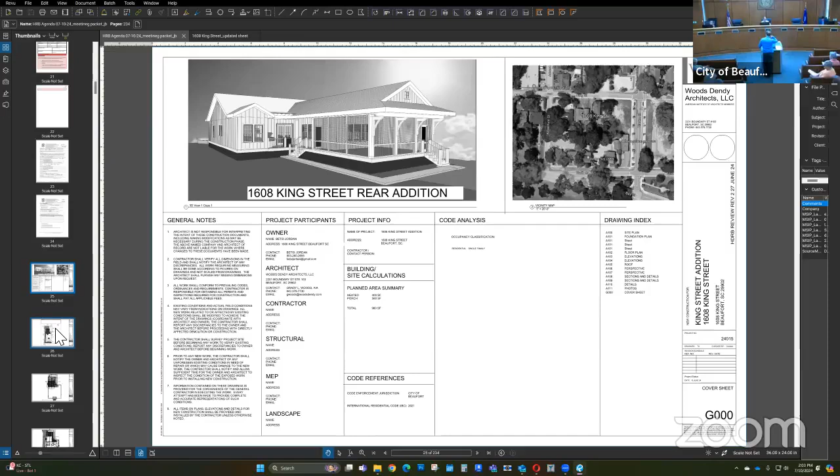Okay, this is 1608 King Street. It's about a 950 square foot addition to a non-contributing home, in the rear of the structure, split between a screened porch and an enclosed extra living area. It went to the HTRC, and they've provided some extra images for this meeting, forwarded to you this morning. No real changes, but essentially this is going to have board and batten. The roof and colors match the existing house, with asphalt shingles that match. No specimen trees in the rear yard will be cut. It is well above the 13-foot flood zone requirement.

Really, the only thing staff is recommending is that they provide cut sheets for the doors and windows, typical window and door details showing the window sills, a clearer site plan, and to note the material for the staircase posts, railings, and balusters. With that, I'll stop. And this would be a final. Asking for final, okay. Thank you. At this point, we'd ask the applicant if they'd like to come up and present.

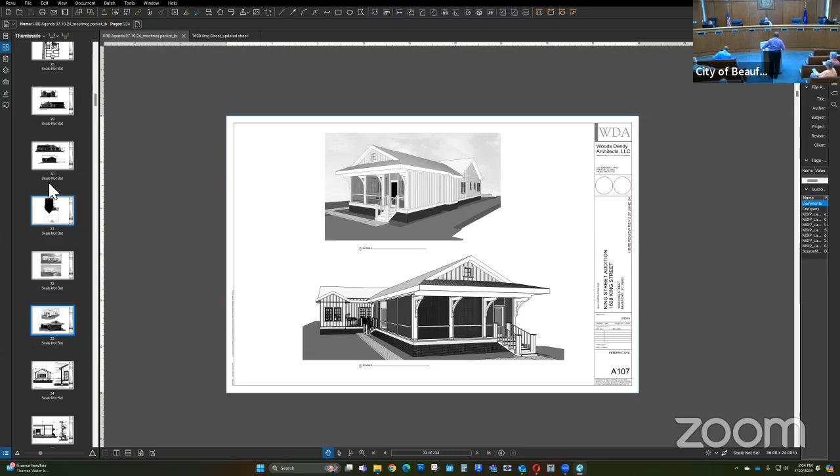Afternoon. My name is Thomas Henry, I'm with Woods Dendy Architects. Basically, the only thing not addressed that staff recommended was the survey, and we have that ordered. Everything else is pretty much in order. We got the window details, door details, sill details. Okay, very good. If that's all from the applicant, we're going to open the floor to public comment. If anyone in the audience would like to speak, like Ms. Lutz is coming up.

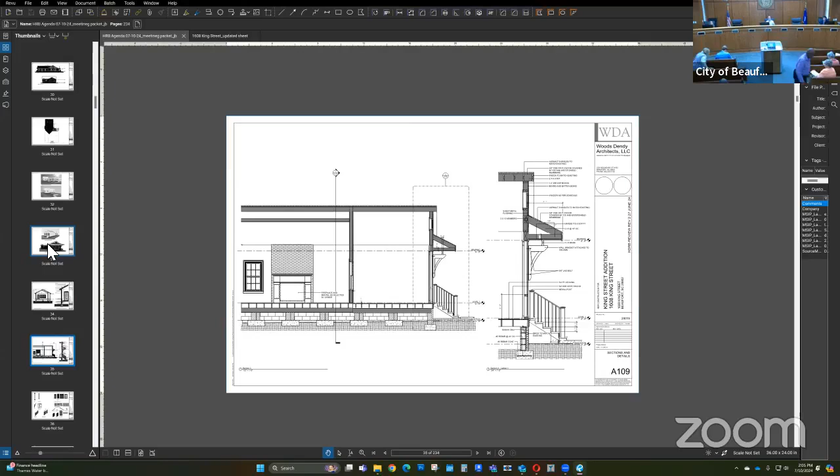Hi, Maxine Lutz, representing HBF's Preservation Committee today with Lisa. We're taking turns. We're very supportive of the project. The one recommendation the Preservation Committee had was that perhaps the returned hip roof configuration over the brackets be eliminated. We felt it's foreign to the vocabulary of the existing building and other treatments within the historic district and the Northwest Quadrant.

The committee offered the following recommendation for consideration: remove the current overhang configuration and replace it with a shed roof configuration, which would be more in keeping with the architectural patterns of the district. Thank you. Thank you, Ms. Lutz. Any other public comment?

Hearing none from the audience. Anyone in the virtual world want to speak to us about this? No, sir, no hands raised. Let's call for public comment. Seeing none, we'll go ahead and bring it back up to the dais for discussion. Okay. What are you guys seeing or thinking or hearing on this one?

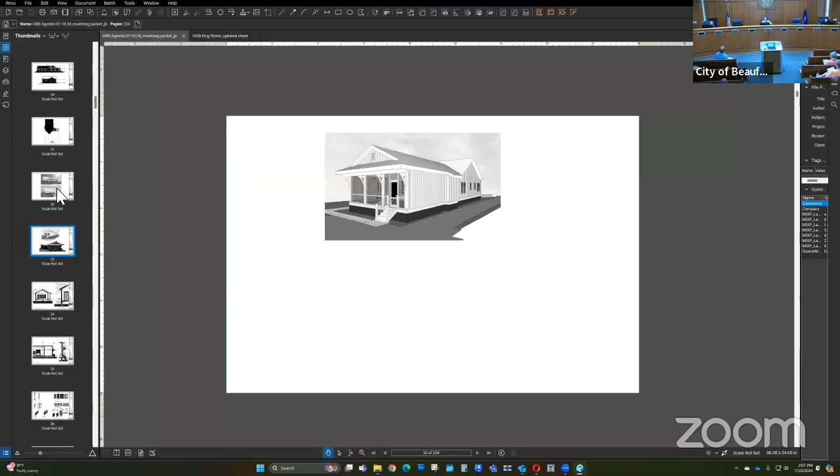I was just wondering about the fireplace, if there was a vent on it, because there's nothing shown. Say that again? An exterior vent, will it be vented? How will it be vented? Oh, the fireplace, okay. Well, let's see what we've got. We can bring the applicant up to answer the question for us. Yeah, the fireplace is not a real fireplace. It's internal only. Internal aesthetics.

To address a couple of items here as it relates to the roof. If you would go to that rendering, I did a few renderings that depict the sun shadow. That one is at 8 o'clock in the morning, the next one is a 4 o'clock sun shadow for that space, and this is a 10 o'clock.

So what we're trying to do here is to also address any concerns as it relates to sun. We're giving the client a nice space to be able to utilize during every time of the day because it has a southern exposure. So that's the reason we have that overhang. It is also going to protect from rain.

All right, since you're already up, I asked a question. HBF's committee looked at this, thought that the continuation of the hip roof into that shed seemed a little foreign for architecture in Beaufort, and it is. We don't see that often. Is that articulated correctly, or is that what you're trying to do?

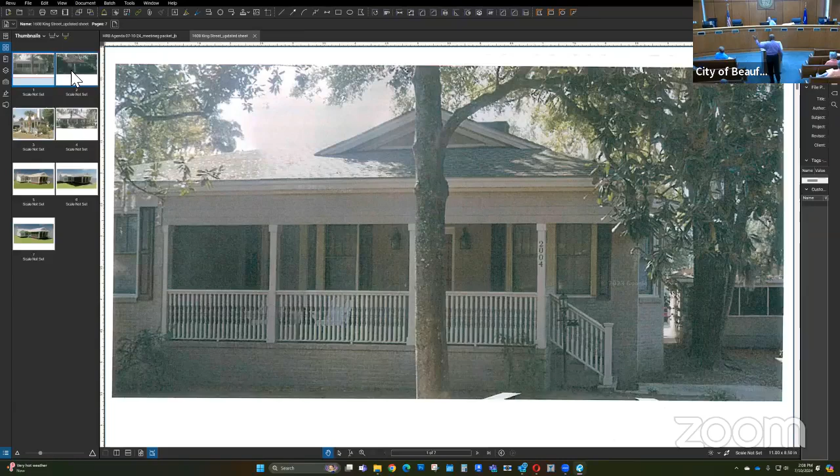Yeah, that's articulated correctly. I did go through the community and look at some of the other structures, which you can see in some photos. You have a structure similar to that. We're talking about the rear of a property now, but this is the front of someone's house, and it has pretty much the same concept. Same thing here. So within the community, you do have some similarities to what we put together. Okay, I'd call that a stretch, but I will entertain it. Okay.

Let's see, Mr. Bergman, do you have anything? You said you had the details for the windows and doors. The last sheet in the last set that we submitted should have it. A110? Yeah, there you go. We are reusing some material, some of the windows and doors, and we've articulated that. Up there you see the photos. So there's no new windows. Okay.

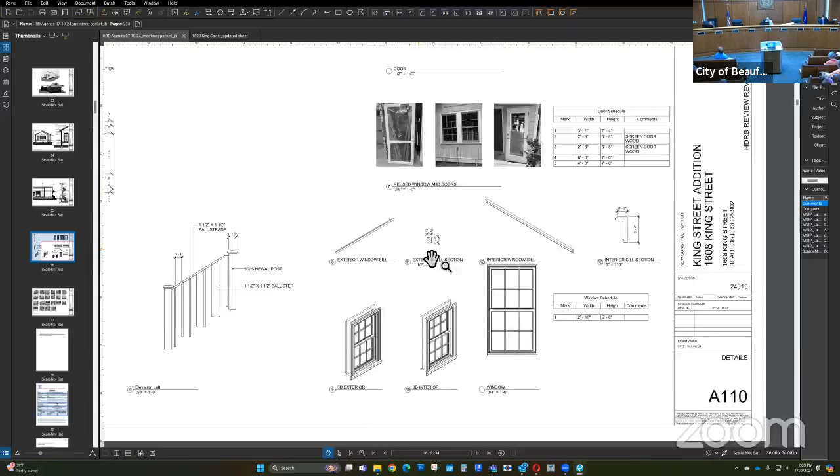Right. I didn't really have any issues with this project, to be frank. I thought there was a lot of detail that went into the notes and comments from HTRC and what's happened before. I think the staff recommendations made sense. I'm supportive of it. Okay. I don't have anything further on that. You have anything on that? I don't.

All right, I don't hear any other questions or debate on the merits of this project. Can I entertain a motion? I'll make a motion to approve with staff conditions. Second. We have a motion and a second. Any further discussion? Hearing none, I'll call the question. Aye. Aye. Aye. Okay. So staff, that's approved with staff's comments, correct? Correct. All right.

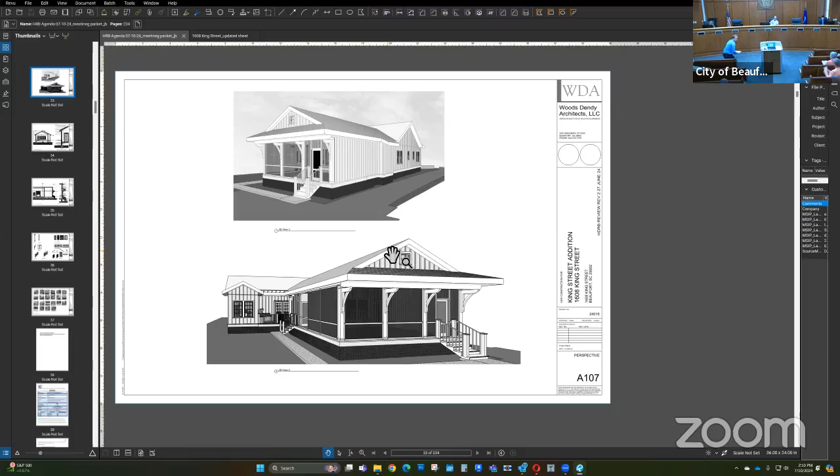We'll bring up the next project, which would be item B, 903 Harrington Street.

All right, this is a new construction at 903 Harrington for a roughly 1,000 square foot new house. Right now it's a vacant lot, about a quarter of an acre, so a pretty large lot for the historic district, that's never had any building that we could find on any Sanborn maps. So a 1,000 square foot house and then a carport and ADU and garage, as well as a pool. So that's a little bit of a difference that we see.

Look at this, it is in T4HN, so it is in the northwest quadrant as well. Looking at the floodplain, everything is well above. In fact, the lot slopes pretty dramatically, but it's almost double the 13 foot for the flood ordinance. Looking at trees, there's no specimen trees on site. There is a specimen tree that's right south of the property, so they are doing a tree protection zone when

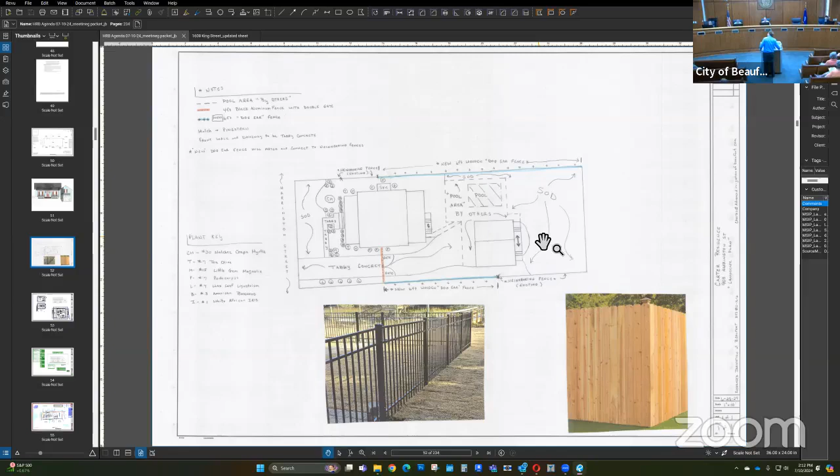they start building. But looking at the project itself, if Jeremy wants to put the house up there, that'd be great. Thank you, Jeremy. Sorry.

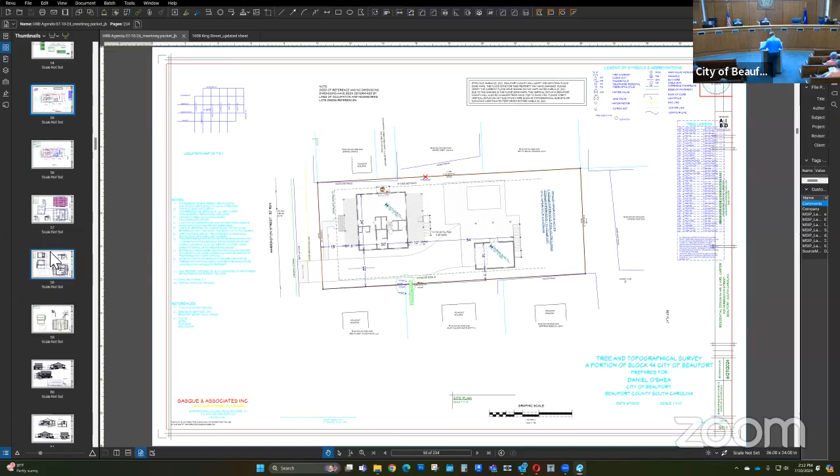They are proposing a 1-story with HardiePlank exterior, the Marvin Elevate, single divided light. Let's see, wood shutters, architectural shingle roof, and also wood railings, and a pretty sizable 8-foot deep porch. And so you can see the drop in elevation from that picture. So it definitely drops down quite a bit. And then the garage and the pool will be in the back there.

You can see all the comments that we had from the HTRC. It went to a few HTRCs; we started including that just so you saw how the project progressed. Looking at the surrounding area, you just approved a new 2-story house across the street on Harrington last month. But otherwise, it's an interesting collection of houses that have really no defined setbacks per se. So some of the houses are far back from the road, some are right up against the road,

but they're all houses. Looking at new construction for the 4.7.2 integrity, the 7 integrity guidelines, I'll let you go through that, but location, design, setting, materials, workmanship, feeling and association. So again, there wasn't a house on this property before, so they're not trying to recreate or be sensitive to that fact. It's also a very large lot, as we were talking about before, and I think staff in general feels that the size and the architecture of the structure would fit with the nature of what's around it historically.

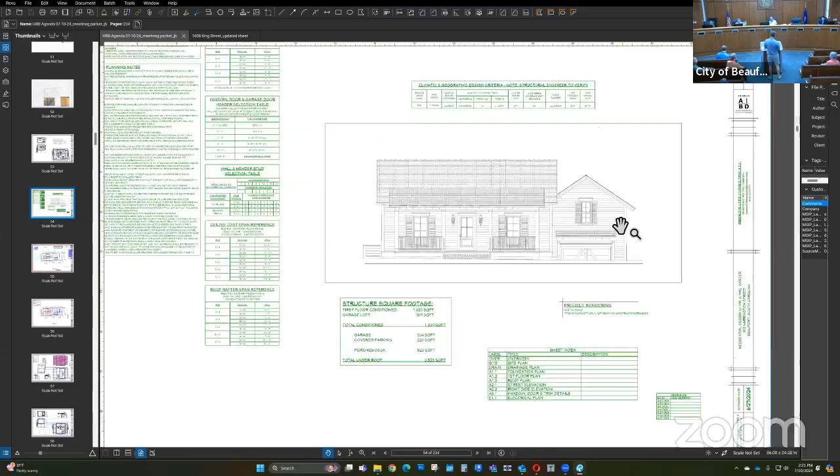Can we clarify which door? You've got one shown with an asterisk, but that looks like a glass. I believe the pattern is the front pattern on the first sheet, and then the glass pattern is on the second sheet. There's a star; I think that's what they're indicating. But it'll be white. Mahogany, color of the trim, I believe? It's the wildflower honey color. Color of the trim, I just don't have that in front of me. So I'm a little confused. On the second page of the cut sheet, the base door, you put a star next to true white with the Thames window. The front page shows basically 2 8 panels with windows above, and the third page shows a door with the wildflower honey. Which is which? Okay, thank you.

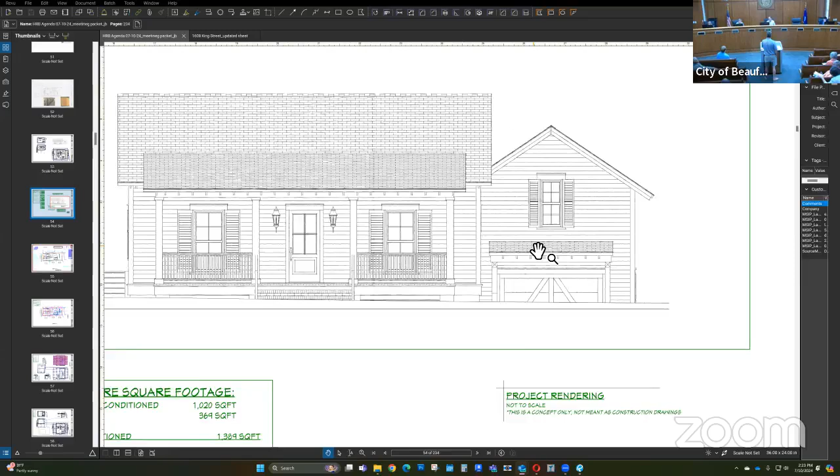Any other comments on the doors or windows? I apologize, I think I'm still unclear. So it's going to be a panel door with the glass across the top? Correct. I appreciate them submitting information to try to clarify, but we should have had this information prior, so we're not having to ask these questions during the meeting. But it is what it is. Other than that, I don't see any issues. I think it's a nice project. Because the site drops off in the back, the scale of the garage is even more appropriate because it doesn't compete with the house at all. So I think that's very much a positive.

So I'm willing to proceed with a motion, as long as they're addressing all the staff's comments, which I think they need to. Before you make the motion, whenever appropriate: HTRC, when they met, did they talk about stormwater issues related to this type of construction and how it affects the adjacent neighbors?

Did y'all get into that? We spoke about that at the original meeting, and there's an actual drainage ditch on the back side of that property. Everything's draining down to basically a culvert, a retainage area that's been there forever. That's functioning as such. Front of the county building over there? And once you go to the back, there's a fence line, and beyond that fence line, there's basically what amounts to a floodplain back there.

Because you look at the topo here, the entrance to your garage, and you've got a plantation gravel driveway, it's pervious, but that's good, right? Right. So concrete wouldn't work in this case, you'd flood your garage, but the bottom line is the house is to the right, or I think that's to the south of your project. Correct. Adjacent buildings are 15 feet, so it wouldn't take much for you to cause a problem with all the water on that property missing the garage and going into the neighbor's yard. You know what I'm saying? The bottom of that picture's on the right screen.

I understand that. I'm looking at some of the topo information here, and this is the typical Beaufort problem. Our neighbors come and build, and then they finish and grade and site change, and they affect the neighbors without even knowing it. And then all of a sudden, we have flooded properties and people upset. I think it almost looks like it would go to the bottom corner, the northeast or southeast corner of that property. I wish they had continued the contour lines to the far right side of that sheet, because it's considerably lower as soon as we get off of our property. Everything is going down to maybe the lowest spot around.

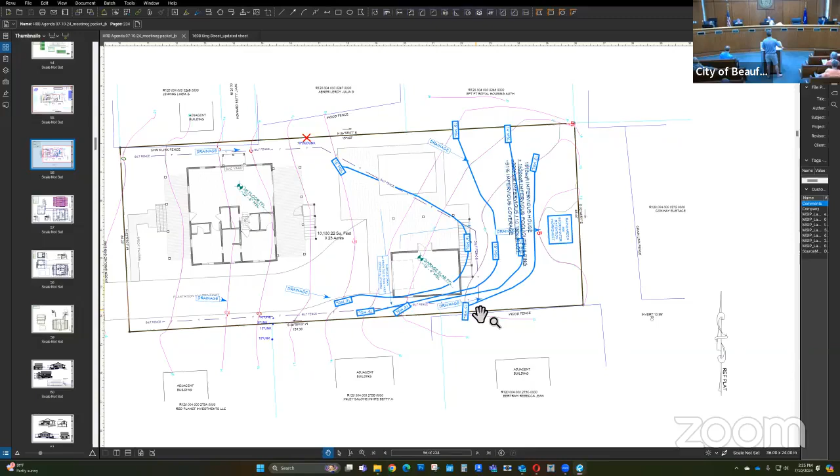I mean, it's low. All right, I just urge the owner to understand their responsibility of building, regardless of who says anything about it, is that stormwater is a real problem in this town. So please don't make the problem worse. I mean, we've got a swale down that side. I don't know. Are you suggesting that we put another drain in on that side? Well, you've got a pervious driveway, not a whole lot you can do, but if you have roof leaders that lead off the building somewhere, they're the ones that cause the problem. So underground retention or detention is the way to handle those.

And try to get every bit of your water, because this is what happened on this site. All the water is gonna go to the rear and it's gonna head towards your garage. Correct. I'd just be cognizant of that and try not to build up too high with your garage, but also, the elevation's gotta be critically correct. Or you'll have all those problems later that you remember me talking about. Correct, I understand. Yeah, you guys have been building for a while. It's not new to you. They'll be building it, but yes, sir. So, all right, very good.

So did you have a motion or any other comments related to this project? No. All right, so remember, this is for final, they're asking for. So that means they have everything that they're supposed to have. Staff's comments would be the only thing that would dictate changes at this point. I wanted to ask a question of the applicant, because if we are gonna switch this to final, I'm in agreement with the staff's recommendations related to the fence panels and not making it opaque, but I wanted to see, did you guys have a rebuttal to that or a reason why you wanted it? Or any contention to that recommendation?

What? So the staff is recommending that you nix the dog ear fence pickets. And that instead of them being butted up against each other, making the fence opaque, that you space them out, so that the fence is not opaque and the posts are visible. So it looks like your fence panels are in between the posts rather than the posts being hidden. Hang on. Yeah, if everybody's here and on record, I'd like to hear the dialogue that was coming back. So there's a question about the fence and its fenestration. Somebody want to tell us about that?

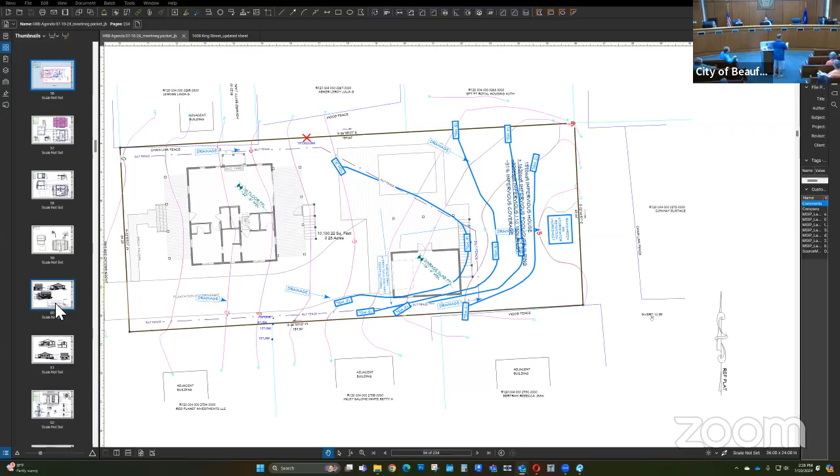So basically, on your fence, you want your boards separated so you can kind of see through. Right, you need to be able to see through. They don't need to be offset, but they need to be separated so that the fence is not completely opaque. Got it? That's fine with me. Fine with you. Yeah, wooden fences designed that way, living fences are appropriate.

So we go back to fences, a whole chapter related to that, or a small chapter. You can look through that and see some of the appropriate measures to take to do fencing. The most viable one in our city right now is like a Jasmine living fence. There's multiple benefits to that, rather than something you gotta paint all the time. But staff has their comments, and we sound like we're agreeing with staff on item number 4.

I just don't want to get you guys approval and you go down that path to try and build this thing, and then you decide that's not what you want and you wish you would have presented something different. No, sir. Seems fine to me.

All right, it's time for a motion. Got one? Well, with that, I would make a motion to approve with staff conditions for final. I'll second. Fine. All right, we have that on the table. Any further comment? None. All right, call for a vote. Start on that side this time. Start on this side, Kim? Yeah. Aye. Aye. Aye. Aye. All right, so that one's handled.

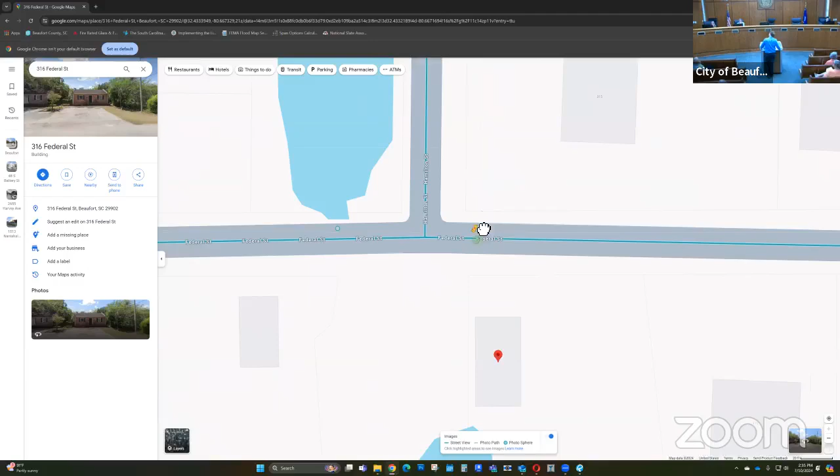And so maybe we should put those two structures on the screen. So again, this is kind of a unique situation. From the staff's point of view, these two structures are well over 50 years old, and they are somewhat unique. I don't know if the screen's freezing up, or I don't have access to it, but hopefully we pull that up. This would be an option where these structures could be saved and then the original February COA could be built, and that would incorporate those two structures on the lot.

So as you can see, they're really, especially in this area, the only two structures on one lot like this. They're also brick, so they are somewhat unique. They are over 50 years old. So they would meet, in staff's view, the requirements of 9.11.1. If you do approve that, it makes it a contributing structure. As a contributing structure, then the question would be, did the approval in February meet the contributing structure guidelines? I think that's something to consider.

You might want to opine on that. It's a very unique circumstance, but the end result would be that these structures could be essentially saved. So that's what's being asked today, and I'll let the applicant present their case. Thank you. Do we have the applicant? You want to please come forward and add anything? State your case.

Lynn King, 316 Federal Street. The only thing I'm trying to do is not have to tear these structures down and go forward with the plan that was approved here. Having said that, I'm kind of done. I don't want to have to start all over again and come back with a whole new plan and be 2.5 years from now trying to find a place to call home.

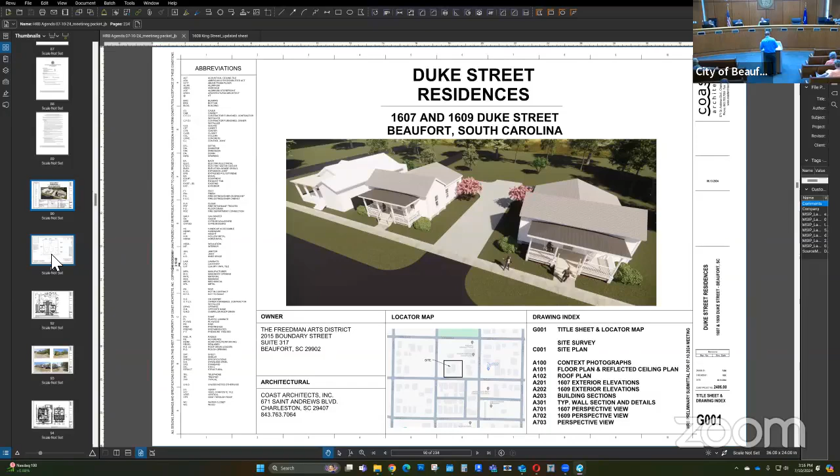The flood zone, it's got 23 to 24 feet. So it's perfectly high enough to not have any of the issues that we were just discussing before. Even those were for new construction, and they're only really removing two trees, a pecan tree that's not a specimen or landmark tree, so it can be removed, and a palmetto tree will be replanted.

The two structures they're proposing are basically similar to each other. And this is for conceptual, I should mention that. And I've also provided the HTRC comments from April when this was originally pitched. But those two structures, a little over 1,000 square feet for both of them, and accessed by one shared driveway. And I will admit, as a planner, I like shared driveways.

So I think the recommendation, and I've heard a lot of comments about that. There was just one driveway on this property. You can see it on the existing site plan. That was kind of to the right of the proposed driveway. And I think there's some concern that maybe it would make more sense to have two drives on this to be more consistent. But again, that's of your opinion. This is just conceptual. They are proposing kind of HardiePlank or cementitious siding, if Jeremy wants to go to that.

Both one-story cottages, basically almost exactly the same, kind of wood steps. They were proposing vinyl windows, so those would be expressly prohibited in the Beaufort preservation manual. So as you can see in the conditions, that's one of the recommendations. They're also proposing wood shutters, an asphalt shingle roof, and a standing seam metal roof on the porch, consistent with what was there before. Kind of two porches that are 8 foot in depth.

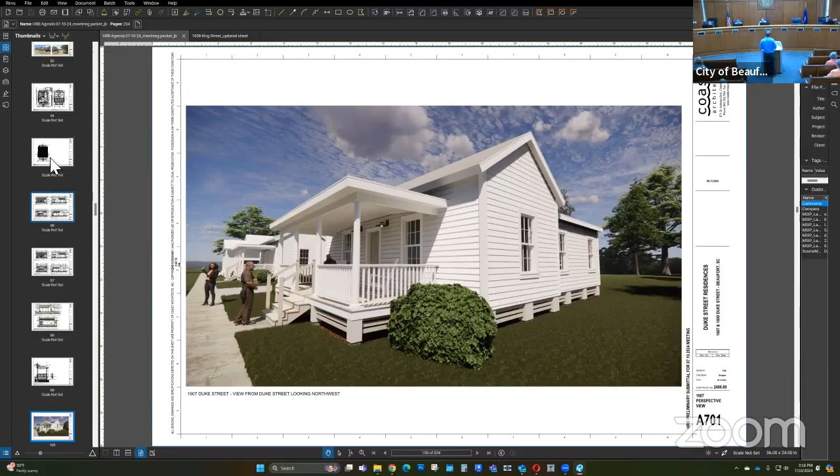And the foundation is horizontal wood, like treated slats there on the bottom. I'm trying to think if there's anything else. So we do have to use the 7 integrity standards that were mentioned in the last few cases: location, design, setting, materials, workmanship, feeling, and association. I think we've talked about the fact that there were two World War I era structures on this site. They were both single-family structures, somewhat close to each other.

I think staff feels like these two cottages being proposed would be sympathetic to what was there without actually replicating them, which would not be encouraged because it would not be honest to what was there before. Two, the design that combines the feeling of the streetscape and the mass and the scale of the architectural elements and details. Again, the one-story nature of them, the size of them, and the fact that they're sympathetic to what was there before but not replicating them meets that pretty well.

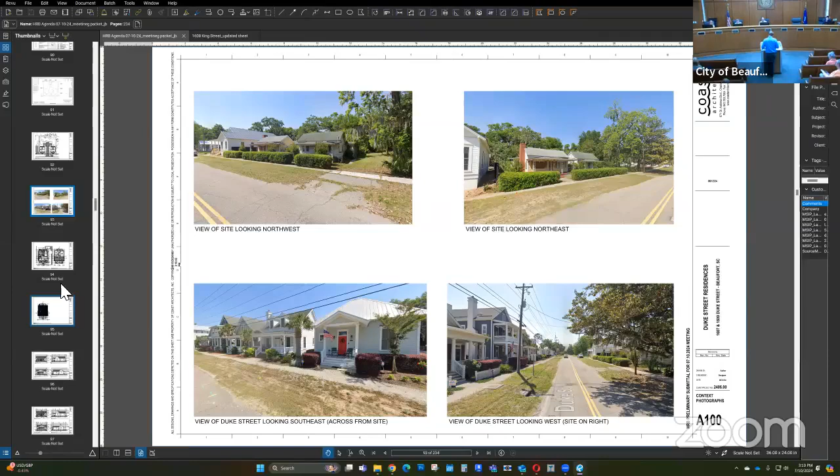3, the setting of the property, that's the physical environment of the property and how it continues to play into the historic district, including the topography, vegetation, man-made features, and relationship between the existing structures and their settings. So I talked about the trees. Really, they're only removing the one non-specimen or landmark tree, and they're replacing or moving the palmetto tree that's on the site. They are moving that driveway, as I discussed.

That is something you can consider, whether that one driveway would be in keeping with the historic nature of it or not. I will say that my staff report was thinking of it from a planning standpoint, where we're always trying to reduce conflict points, so if you want to opine. But we do feel that the cottages are sympathetic to the mass, scale and design of the former structure as well. So I'm kind of repeating that.

4, materials, that the materials are sympathetic to the historic nature of the surroundings. And I think we feel like the fenestration, except for the vinyl windows, the depth of the front porch, the standing seam roof on the front porch, all those things would be consistent. 5, workmanship, which is similar: is there evidence of the crafts of the particular time period, et cetera, that ensures the fabric is retained. I think we've talked about the same things, the vinyl windows, et cetera, being replaced, and we feel like this would definitely meet number 5.

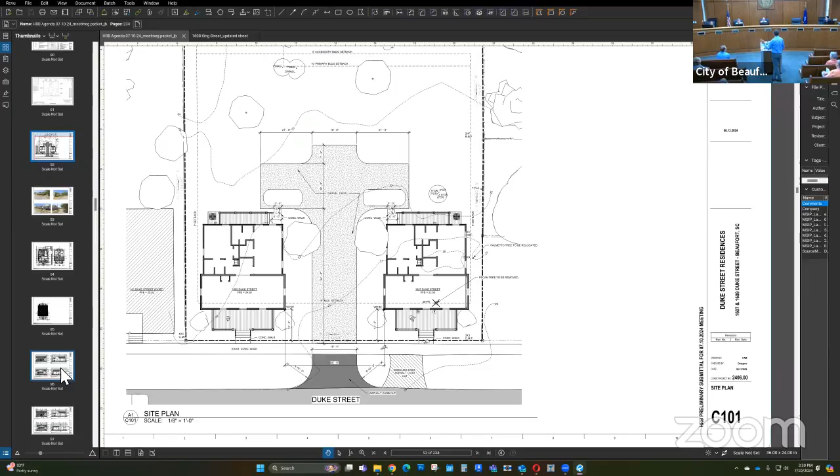So your comments were, are we to eliminate or consider eliminating rails on just one of them, or would both? I'd suggest you lose them on both, just eliminate them on both. Sorry, Mr. Chairman. Well, go ahead. I think the forms are so simple. Yeah. Why overdo it? I agree. These are simple cottages. In our final grading, we'll figure it out to make sure we're okay on that, but we were trying to keep it roughly around 2 feet, just so initially we didn't want to do rails.

And then the other, I didn't hear any comments on this, and there was a staff comment about one of the roofs being a shed roof on this rear portion versus being a gable roof. We actually initially had done a hip roof on one of them and a gable on the other, just to make a little differential. And the comment we received from them was, don't do that, because the hip roof is not typical in that neighborhood. So again, we can consider that, but I just didn't hear your conversation, so I don't know if that's gonna be a part of it or not.

As far as conceptual, I don't have a problem with the roof designs. I just think trying to make them different would be a direction I would take it, one more stroke of the pen to see if there is a way to differentiate. I would disagree, though, that hip roofs aren't part of the porch designs in that neighborhood, so they are appropriate for this scale of a building.

I did notice one more thing I'd comment on. You have your AC stand built into your porch deck on the rear, on the north elevation of 1607. And just in a practical sense, I've never seen that done. I think isolation of the platform away from the building will give you less problems in the future.

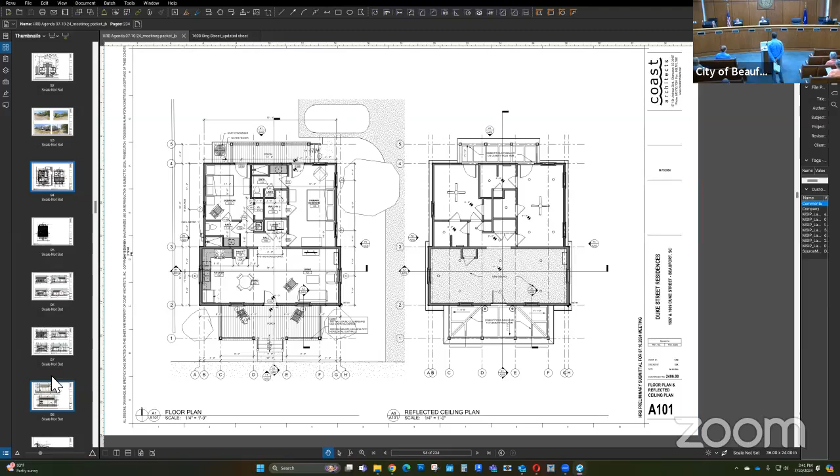Yeah. Okay, thank you. I just wanted to clarify. So it is conceptual. Any other comments? Get a motion for conceptual? So what do we want to add? Do we want to add that they restudy the driveway, in addition to the staff comments? Do we agree with staff comment number Delta about the hip roof and changing one of them to a shed roof?

I might be alone in this opinion. But I almost think they're similar enough. You do see some structures where you had brother-sister cottages that are identical, and the only difference is maybe what color they're painted. And I wonder if that wouldn't be appropriate for these, especially if you move them closer. So I don't know.

On the one hand, it's to differentiate them, but if you're only differentiating them a little bit, then to me it almost does look more like a tract-built home, because you see that in plenty of tract-built neighborhoods where you have a tiny differentiation, versus intentionally just making them the same. Agree. I think they're stronger like that. No problem with your comments on that. So again, it's a conceptual level. Right. But with that, we have a credible architect, I think we defer to them on if they want to differentiate, but I think keep it simple. They're strong that way.

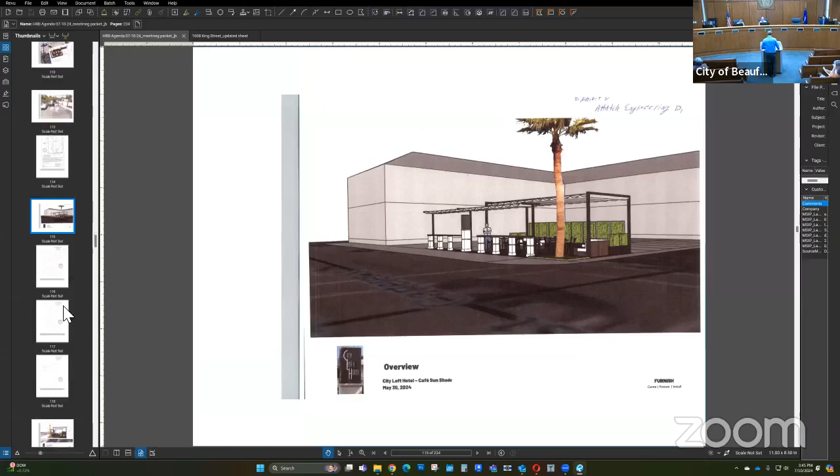Let's see, they're metal posts, 4x4 metal tubes. The bar top is wood. It's proposed to be laid over the existing bollards. They're going to uplight with LEDs. They have a fabric roof that we've looked at. And then they have 4-foot and 6-foot planters and screens with climbing plants that they've proposed, Carolina Jessamine.

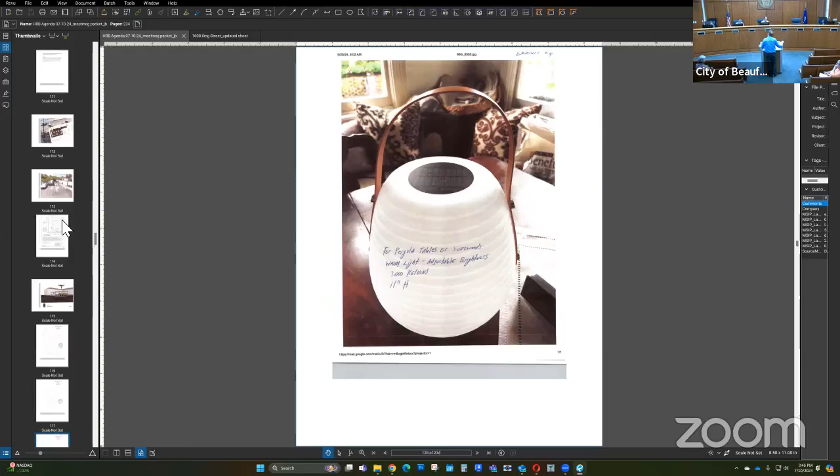So I think staff is comfortable with at least all the things that they have proposed. We do have some recommendations with that, and that's if you consider this, and this is for final approval, that really the first one is I think staff feels like because there are so many conflicts potentially with the ADA space for that small 4 by essentially, I think 17 or 19-foot area. That's not the square area, but the area that's to kind of the panhandle there of that kind of Oklahoma,

if you will, section. I guess staff doesn't feel like that's really a very functional space, and it would recommend removing it from this. It would recommend not approving that space. We just feel like just too many conflict areas with parking, and it just isn't functional. That they provide engineered stamps on the metal beams. They'd have to do that anyway before they got a permit.

And they're recommending a lighter lattice for the climbing plants, and maybe not as heavy planters that they're proposing. We feel that that's a little, I guess, heavy for the area. And so those are the staff recommendations, but otherwise, again, this would be final approval we should be looking at. So I'll turn it over to you. Okay, thank you. We'll open the floor to the applicant. Mr. McElhaney, you want to come tell us anything different from last time?

Good afternoon. My name is Matt McElhaney. I'm the owner of 301 Carteret Street City Loft Hotel. I believe that Kurt sent me a number of questions, and most of which are related around the ADA compliance as the space he described adjacent to what he also described as Oklahoma. I have complied with the code. I think I showed in the second submission, we're at 195 inches in width, 18 feet in length at that space.

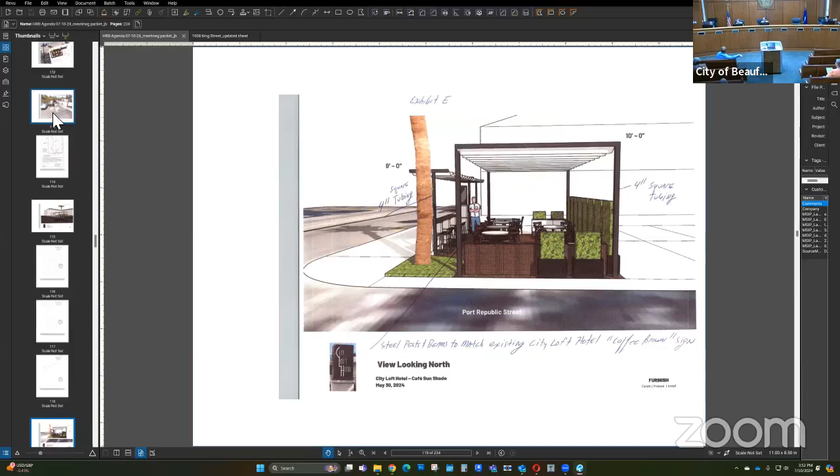I saw their comment about the weighting of that piece, that lattice attached to the planter, which it does look heavy. I don't think that particular setup is great, but I don't think he's advocating for that setup. He's advocating for that color. Is that correct? So the color's fine. The whole project's fine. Right. I have to say, I like the panhandle, as you call it. I think it creates a nice buffer from the parking lot. Yeah, the ADA stuff looks like it's in compliance. It doesn't bother me. Yep.

Okay. Mr. Woods, you have anything? No, I think it's gonna be a nice little addition to that corner. I see no issues with it. Okay. I'm gonna drink coffee there.

I don't have a problem with either, and I'm kind of agreeing that I think the applicant's proven that he has enough room to manage his property for ADA parking, and if he doesn't, and he builds this and he blocks it, it'll be another price to pay later by someone else and not this board. But it looks practical, whether he serves on it or you stand on it and have a cup of coffee or read your magazine, doesn't matter to me, but I don't have a problem with it as presented.

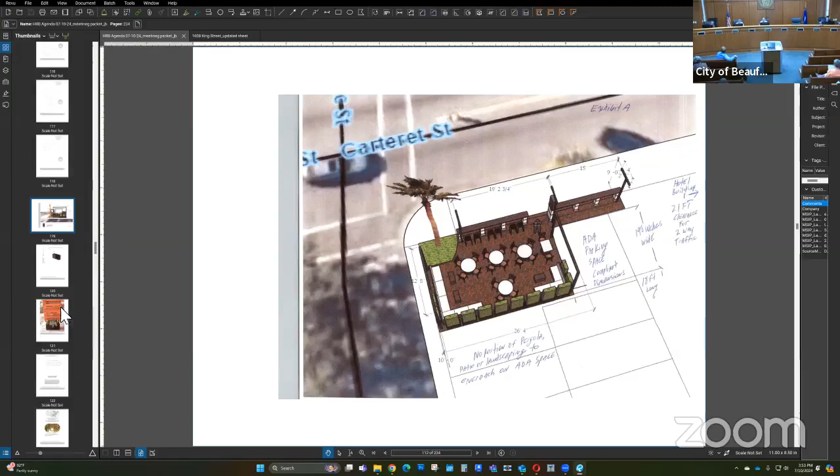So I think staff comments are all good except item B, if we're all disagreeing with their comment on that. I think B and Delta, because I think Delta was presuming that that cut sheet, if you will, was indicating that specific type of wood lattice. I don't think that's what the applicant's intending. I think he's intending to use that as a reference for the color of the lattice, not that specific. Okay, well, they're recommending a lighter material though.

Okay. I think we're ready for a motion on this one. Would you like to make a motion? I motion to move forward with staff approval. Okay, and recommendation item B on staff, make sure if you have anything you don't agree with on staff comments, make sure you highlight that. Oh, okay, got it. So I'll make a motion to approve with staff conditions except for item Bravo and item Delta.

Second. We have a motion and a second on the table. Further discussion? None. Is that okay with you? Aye. Okay, let's go ahead and vote on it then. Go ahead and let you vote now. Aye. Aye. Aye. Okay. Mr. McElhaney, you can go to the next step now. Pull out your checkbook.

Can we take a bathroom break? Yeah, let's take 3 minutes. Yeah, that's a good idea. All right, so look, staff, we're gonna take a 3-minute break, folks.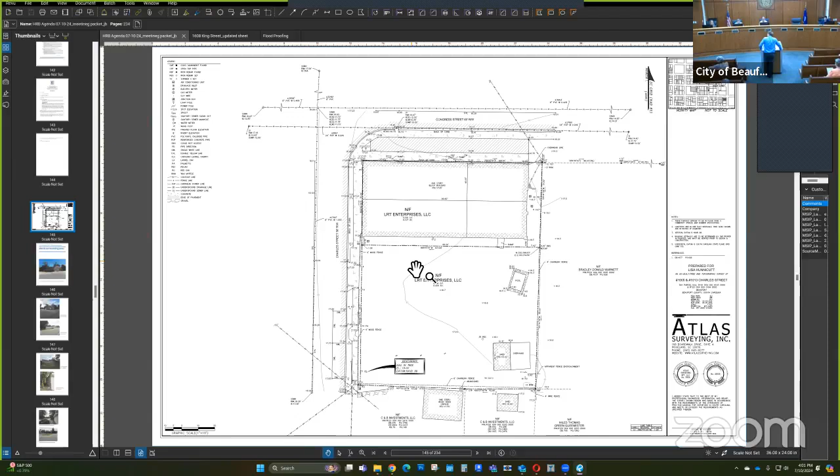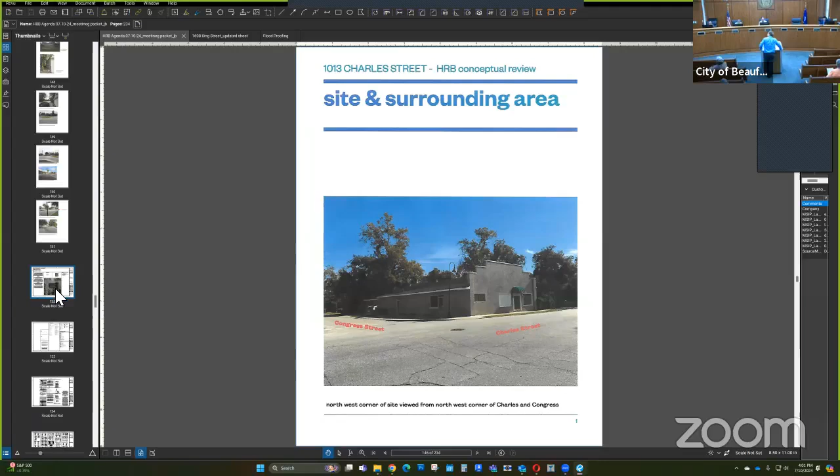All right, let's go ahead and bring this meeting back in order, and we'll continue where we left off. Okay, we're moving right along. So 1013 Charles Street, they're recommending conceptual approval, and this is basically to add a second addition on an existing commercial structure at 1013 Charles Street. It is zone T4N, and there's the structure right now. I think probably everyone's pretty familiar with this building.

It is currently non-contributing, and I was trying to find the age on it, but we couldn't really get an accurate age on this building. It looks older than one can imagine, actually. But it is in flood zone X. The elevation is 17 to 18 feet, and they have not done a tree survey as yet. It is a conceptual case right now, but they'll have to do that later. Right now, it's kind of a small lot, but the applicant owns the lot to the south of it, where they park the tour carriages.

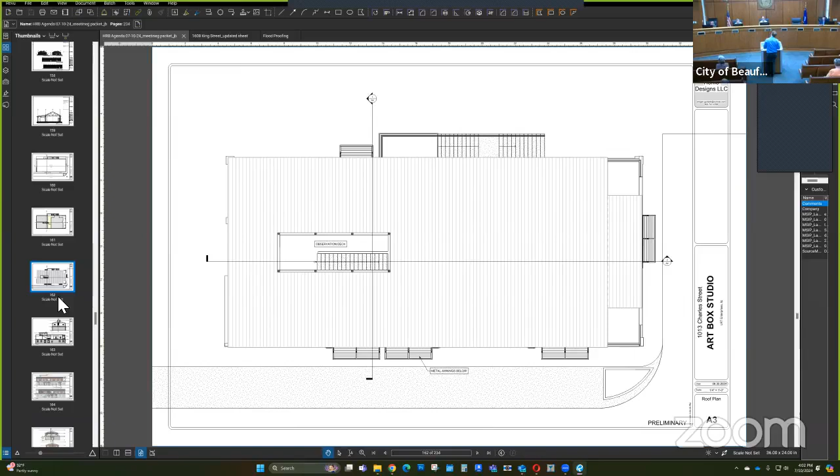So both of the lots, I think, are being considered right now, but they're proposing to structurally reinforce the existing little over 4,000 square foot building, and add another 4,000 square foot second addition, and to turn this into a mixed use building where there's retail, I believe 3 retail, office, coffee shop, something of that nature on the bottom, and then 3 flats or dwelling units to the top. So that is the proposal.

It went through a few HTRC, both on 5/29 and 6/12. So you can see it received some extensive comments, and they made some extensive revisions since those HTRC meetings. And they provided some 3D views. So looking at it, they're proposing a stucco first floor on that retail section, and a brick veneer on the second floor where they're proposing the flats. They're proposing a collection of different window types, but again, the final details of those wouldn't be until preliminary and final.

Glass doors, they'll retain the existing parapet roof. That was a big discussion at the HTRC meetings, as you can see in the packet there. Also adding some awnings on the two front entrances. They're proposing a standing seam metal roof with a barrel design.

Also, they're proposing like an observatory deck that goes up to 34 feet high on top of that roof. Otherwise, this is about 24 foot high for the second story addition. I think I've talked about the fact that it's well above the 13-foot floodplain requirement.

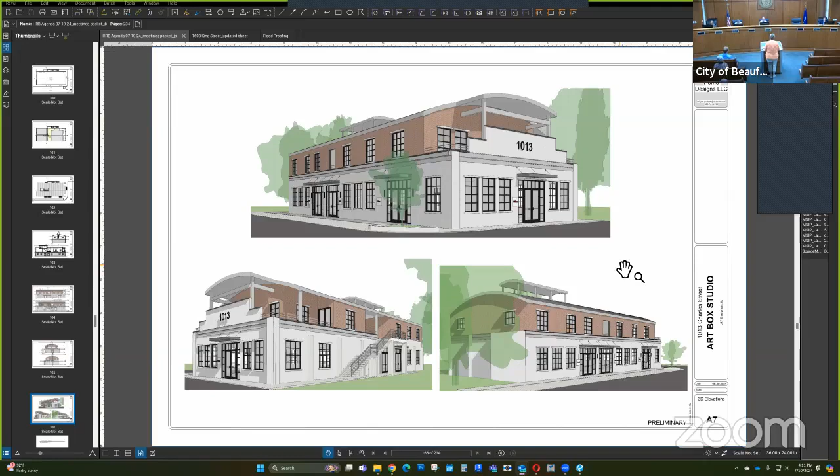We support it. We support the second story going there. The goal was to really follow the narrative of the original piece of architecture, and in adding that second story, I think we and our committee think that a sensitive design was accomplished. Thank you. Thank you. Any other public comment? Okay, hearing none, we'll close public comment, bring it up to the board.

This is a conceptual review of an existing commercial space that I believe is zoned as neighborhood commercial at that end. C4N, and that includes any residential uses and commercial uses, correct? Yeah. So what we have before us, we're taking a modification, adding a second floor to an existing structure. Any comments? Yes, Mr. Chair, I'll start.

Transformational. This is exciting. This is what it can be when you work together and you have good architecture and good design. It's just amazing. I agree with what's been stated. I appreciate what the applicant stated earlier, maybe reducing that to a clerestory element on the roof, minimizing it just so she can allow natural light to come into that upper corridor. Hopefully staff would agree, and Mr. Buford would also agree. I think that would be a good design change, and removing that barrel roof extension.

I agree with all of those items, and I know this is not our purview, but I have to ask, is this on-street parking? How are they dealing with parking on this? I'm just curious, because I don't see a site plan. The property to the south is double the size of the current lot. I see the vacant lot, but I don't see any development of that as far as the parking. Yeah, they haven't provided a landscape plan and a full site plan, so parking would have to be provided on that lot. The residual part of that site would be on-site parking. That's what I understand. Obviously the applicant's online, but I think they just haven't gone to that next step, and they just want to get conceptual to make sure that you like this idea.

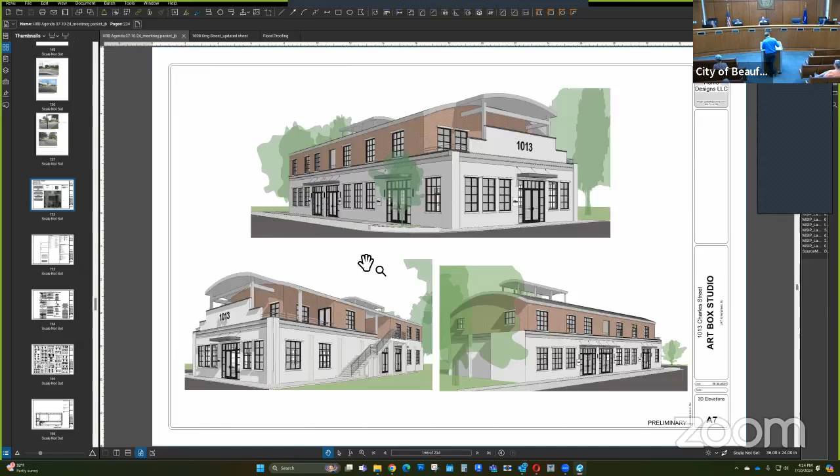But this is not unlike the next one. Parking is required here. We can count the on-street parking that's around it within a certain measurement area. But if we're giving a conceptual approval, shouldn't parking be part of this design? Because I know we're looking at the building, but I think it has to be. The lot to the south of it is a decent sized lot, and so I'm pretty confident they can fit that in there.

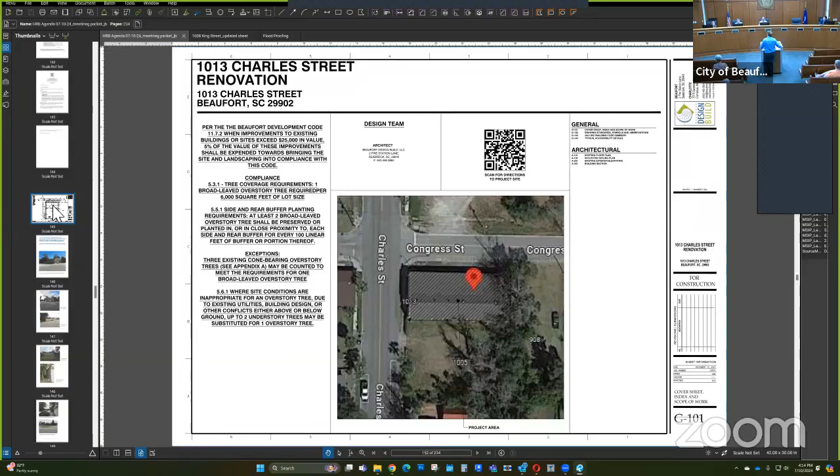Would they have to... so there's two things that they'd be doing here. I know this is a little bit separate, but this would be a change of use because it's going from commercial to mixed use. And then they'd want to use parking in an adjacent parcel. Would that not require a combination plat? It's the same lot. Oh, I see. Okay. That's helpful. Yeah, the other lot's almost 10,000 square feet. I think you're just approving this concept, you're not approving the parking, you're just approving the conceptual design, and that would be developed as this project moves forward. That's correct. And obviously in the conceptual approval, you're asking them to come back with all those details. Yeah.

And they're not going to get through the process without providing proper parking requirements for the use. So I'm okay with just opining on the structure itself. And from the comments I have, I'm not really excited about the observation deck, and I kind of question, other than light coming in, which would normally be a skylight, why would you give up that much interior space for that feature?

I mean, I get it if that's something that you feel important, but that neighborhood is a combination of a streetscape, it's neighborhood commercial, that has some commercial zoning history all the way down that street. But it also has neighborhoods adjacent to it. And what are we observing from the observation deck? Just open air? Architecturally, it just seems like an odd hat to put on top of that barrel, plus it adds some complexity to how to maintain that structure.

I always look at it in the sense of what do you do 10 years from now with our climate? Is that glass? I'm assuming that could be glassed in, but then it's got to be conditioned. If it's not conditioned, it's a breezeway cover. I don't have a floor plan that really shows me how that's separated. But I think the applicant has already gone beyond that. You wanted daylight in there. Right, but as far as the observation, now it's not an observation. She's conceded. That's just a clerestory, just to bring natural light into the upper floor, if I understood what she said earlier.

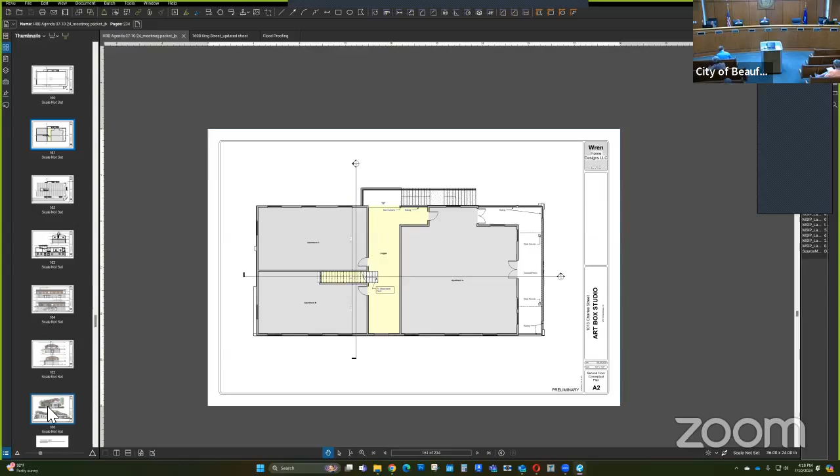Okay. The other question that came up was the barrel top at the front of the parapet. Well, I don't have an issue with the way it's designed currently. I like the concept staff presented with maybe a flat awning of some sort that matches what's below the sign numbers. If it's the width of the upper part of the parapet, or maybe it has to reach all the way across the double doors, it'd still be appropriate, but I'm not totally opposed to that curvature design. I'm actually with you on that. I don't know what is gained by getting rid of the barrel roof that protrudes over that deck and swapping it out for a shed roof.

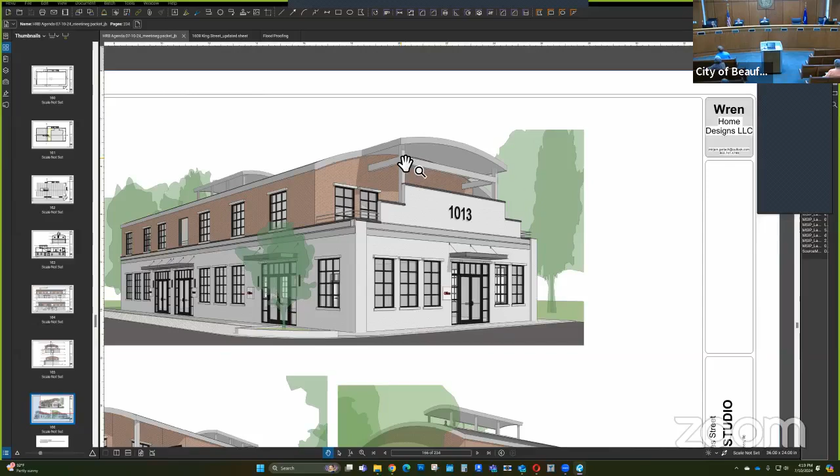I guess Jeremy or Maria, what was the thought process behind that? Yeah, can you hear me? Yes. Okay, good. My mic's working. Really, it was just more about the awkwardness. Visually, it seems a little awkward the way this is engaging this front parapet, this horizontal component here. Right now it doesn't seem well thought out. Our first thought was to pull that back, away from the back of that parapet, and then, as mentioned, to float something else here that might be a little more subtle, but still provide shade. I see. I could sympathize with that.

Okay, so I would say that if we gave them conceptual approval on this, we might want to have them, in addition to the observation deck, noodle on that, again, considering staff's comments. And if they want to come back holding firm on their design, I'm okay with that. If they want to show us something that meets staff's comments, that'd be nice to see. And then we have something to compare to.

As far as the overall adaptive reuse of this building, I think this is an incredible opportunity. When I was a young teenager, there used to be a bar that I'd walk into, but I was escorted by a parent.

So that whole end of Charles Street was a commercial zone that was, I believe, different than it is today. It was Charles Street. But that's one of the last remaining buildings in that use, I think, down there. But it'd be nice to see it turn into this. So I'm supportive conceptually. Any other comments related to what we actually see here?

Yeah, I agree with the staff comments regarding the barrel. I don't think it's necessary. I think it takes away from the original building. I like the fact that the brick part, the second floor, is recessed back so that the front really pops. And I would love to see some other options for providing protection from the light, but, excuse me, I don't think the barrel vault coming out is appropriate.

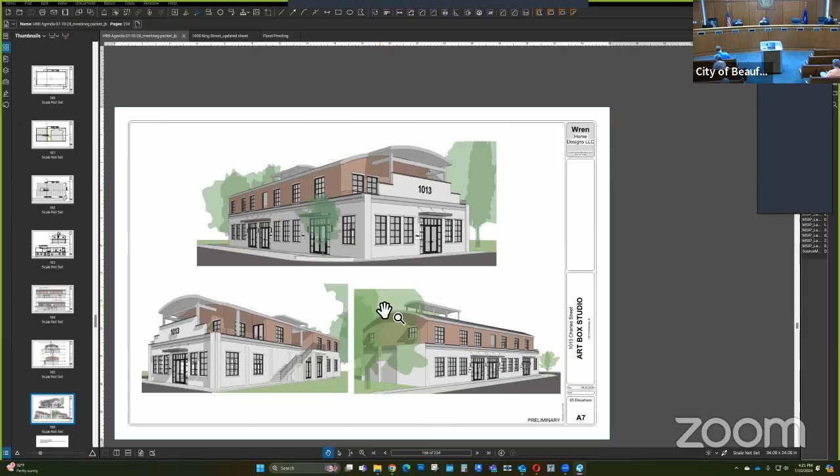I'll make a motion that we approve this conceptual application with the staff's comments. I'll second that. Okay, we have a second. Any further debate on that? Hearing none, we'll call for the vote. Aye. Aye. Aye. Aye. All right, thank you, applicant, for a nice presentation.

Thank you. And I have to give a shout out to Adam Bury for the original barrel roof concept. So thank you, Adam. There's candy in the back for you.

All right, we're gonna move on to the next one, which is item G. Okay, yeah, this is 1406 Greene Street. Staff is recommending conceptual approval. I think the applicant applied for final approval, so just so you're aware. And there's one slight little error. I did put accidentally contributing home, but the rest of it says non-contributing. It is a non-contributing home, circa 1965, with a CMU exterior. It is in the T4HN district.

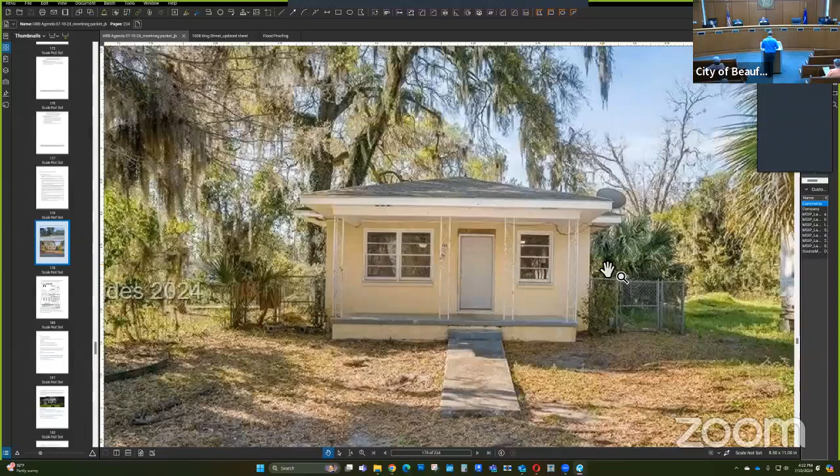This is essentially like a rehab of this house, so no trees will be affected. The flood zone, which is way high at 24 or 25 feet, also doesn't really come into play either. Again, a small house. They're proposing to install a metal standing seam roof, fix up this house to convert one bedroom to a bathroom, remove a door from the side of the house, convert one of the rear windows into a door, paint the home, remove the metal columns on the front porch, add board and batten on the front exterior, and a tabby foundation as well.

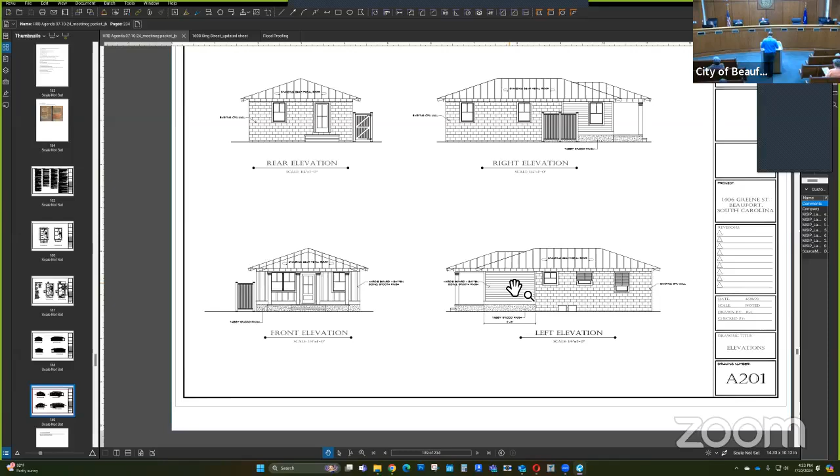So that's the overall. Again, it's a non-contributing home. It did go to the HDRC in April, and you can see some of the comments that were discussed. The windows they're proposing are the Kolbe fiberglass window. I think I've talked about the rest of it. There's a lot of staff recommendations on this, too many to really read, but essentially that's why staff feels like this really should be a conceptual level approval.

A lot of the concerns are just, it does have that unique CMU block exterior, and there's a lot of concerns about changing that front and how it affects the historic nature of it. And also concerns about using a tabby for the foundation. That's just not recommended under the preservation manual to be replicated. It's very hard to do. Just thinking about different siding material, and also the Bermuda shutters, providing cut sheets; they're thinking about that.

There's a lot. I just won't go through them all because there's like 15 of them. But I'll turn it over to you and let the applicant make their case. That's it. Thank you. Thank you. All right, we'll bring the applicant up to talk to us about what she's trying to do.

Hi, my name is Lakshmi Poe. I live at 911 10th Street, Port Royal, and we bought this property about 2 months ago, and we're trying to rehab it, and I want to say that we're very interested in keeping the ecological, historical value of the property, right?

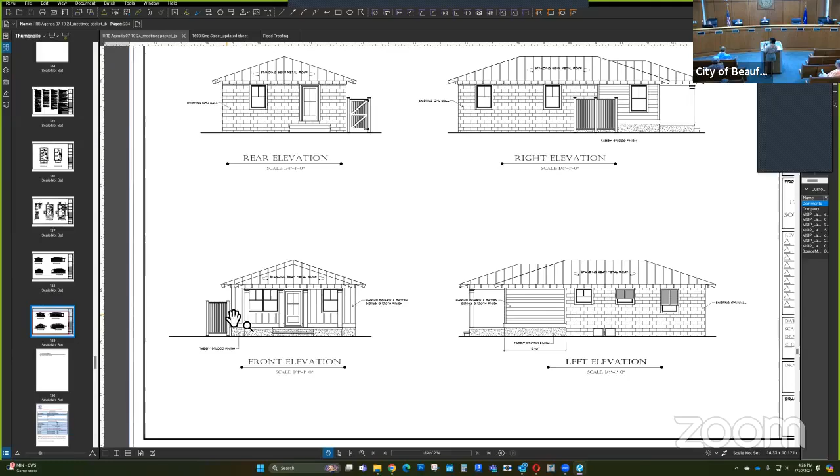Then the porch pillars. Unfortunately, as beautiful and original as they are, they are kind of rusted through and they are bowing out. They are structurally unsound. Again, I'll show photos of them in my later submissions, but they're rusted at the bottom to the point that they're bowing out. And in our home inspection report, they even reported that there are some horizontal cracks right above the door.

That's not visible in this photo, but we're going to meet with the engineer on Saturday. That guy will tell us whether or not these porch pillars are structurally sound. And maybe if they are, we'll try to keep them. Who knows? But very likely they will be replaced.

The staff at the HDRC supported cedar wood columns, albeit narrower, 4 by 4 inch. I'm cool with that. I could also support metal tubes, 4 by 4. I could also support something like wrought iron that takes a similar shape, like a very thin tube and circles and stuff like that. I can also support that. And yeah, I think that those were their concerns.

And oh wait, the siding. Let me work on that, because I feel like I got a lot of opinions that maybe we can just refresh it with just a stucco finish. We don't need to do board and batten. We don't need to do lap siding. But the staff did say, even though they don't support it, okay, they'll live with that, I guess. Yeah, that should be all the major concerns.

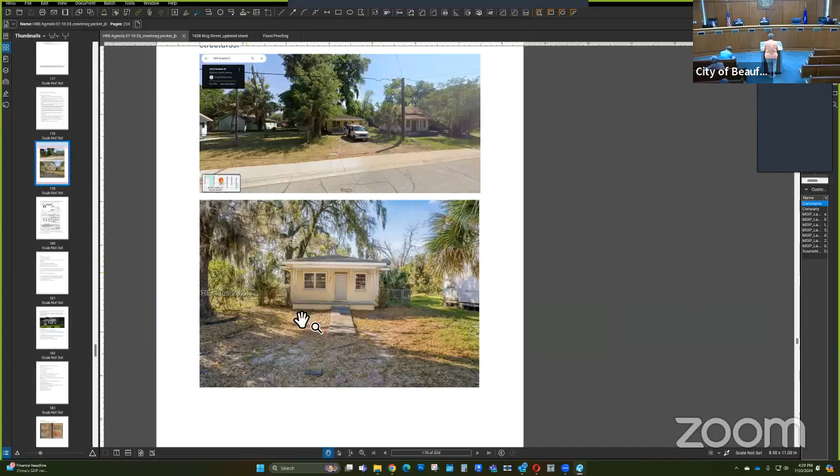The windows are another character defining feature on this structure. And I understand that they may need some work, they may need some repair, but without any documentation that the windows are unsalvageable, it's really hard to say do a wholesale removal and replacement of all of the windows in this house. We too were a little bit confused at first by whether it was contributing or not contributing, but I think the standards, just as they would apply to the two structures at 316 Federal, have bearing on this too because of those critical character defining features.

The metal posts that are coming down also could be salvaged, or they could be purchased, recreated, or repaired. So just because something's rusty doesn't mean that it cannot be salvaged and saved if someone wants to respect the historic narrative of the architecture and of the property. So I think the concern becomes, where do we as a community want to be with respecting our mid-century modern history within our community?

Because by covering it with siding or covering it up with a stucco finish that it never had, by replacing the windows with windows that are not at all similar to what it had before, so no in-kind replacement or repair of what had been there before, and removing those columns takes away those key character defining features that really speak to the workmanship and the craftsmanship that went into that property, which was probably a worker's cottage back in the day, in the 50s, 60s, when it was built.

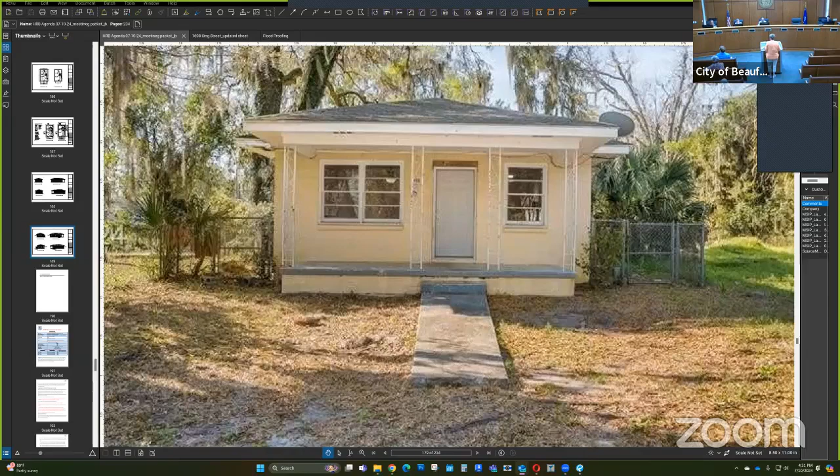And I think that's an important part of our history, an important part of our narrative. So I will leave it with that. But we support her investment. We are very thankful for their interest in wanting to be a part of the community and the historic district. Thank you. Thank you, Ms. Sundell. Any other public comment?

All right, not hearing any, we'll bring it up to the board for discussion. I have a question for Lisa. Lisa, are the steel columns, metal columns, are they original, do you think? They've definitely been there since the 60s. I'm afraid that this building is important. I agree they should stay or be replaced with something almost a replica of that.

It seemed like everything, all these others are getting a little too farmhousey and clunky in some ways with the 4x6, 6x6 columns, et cetera. I think this is a very distinct look. I also agree with the comment about keeping the block, just keeping it in its purest form.

I understand the issues with the windows and replacement, but if you have to replace them, why can't you try to replace them with windows that match what's there instead of trying to change it to, again, more of a low country 2/2 or 2/1. I think that it's so simple and crisp. I think try to keep it as close to that as possible.

Other comments? I had some comments related to the presentation, but I guess I have a more philosophical question for the board and anybody present that might be willing to share their opinion. At what point does something become historic and worth saving? Because this is mid-century modern and we're saying it's worth saving, or that's your opinion and Mr. Wood's opinion.

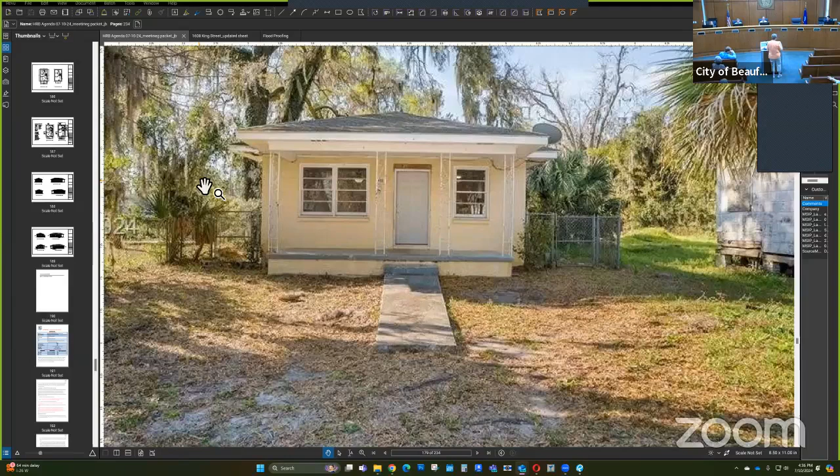Right. So that gets taken into consideration as kind of a given, that you're looking at 50 years or older. But who says every property that is 50 years or older is significant or brings some sort of character defining element or feature that you want to recognize and preserve? So it's still kind of building by building.

Right. But I think we have to always remember, and it says this in the preservation manual, and I think the code too, that the district is the resource. And those elements within that district all have significance from the perspective of the historic documentation, the direction of the National Register, and where the recommendation was to take it up to 1973. But again, right now, the period of significance is 1953.

Right. So it's 50 years old. Right. No, I think I'm good. I understand. The point is 50 years, but then it also has to be something characteristic of an era. And I guess my point would be, that makes sense to me. I think the more important thing is it characteristic of an era and less important about the time. And its own heritage and design based on those seven integrities.

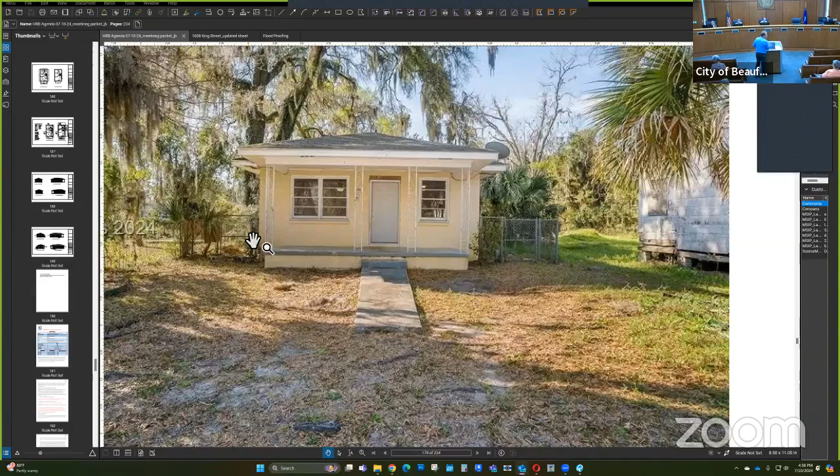Okay, let's bring it back up to this particular project. Look, I just think it is a relevant thing to think about though, considering this particular one. Well, look, first of all, we're dealing with what's in front of us, and what's in front of us is a non-contributing structure asking to get renovated and repaired and has some viable reasons why it needs to be done. The building is not in great shape. The windows are not in great shape. Asking for a report, yes, fine. Get out and go look at them yourself or understand this style building and you'll know what's going wrong with these windows.

Now, if we made this contributing, then we could probably include those in that language. HBF shaking their head, but if you want to read the same manual, it's right in there. I'm not misinterpreting it. I've known all along, open CMU block walls is not appropriate in the historic district either on the current code, but we haven't included any historic structures to make that appropriate today. Right? So we're dreaming for the future, but that's not where we're at. We're here in the now.

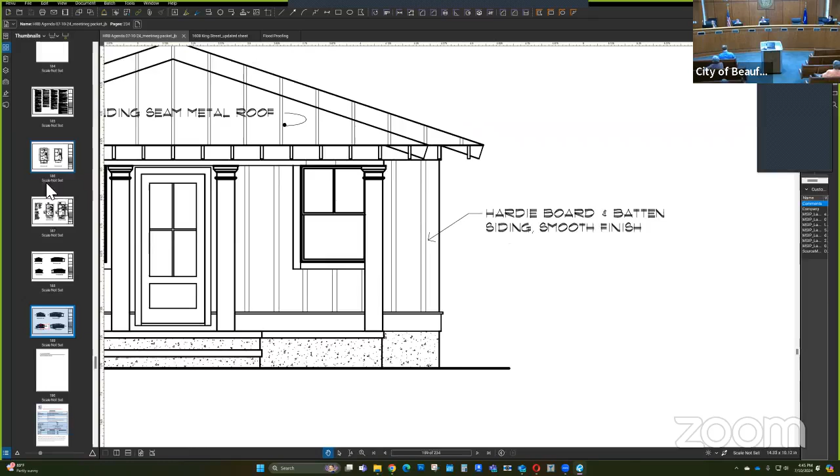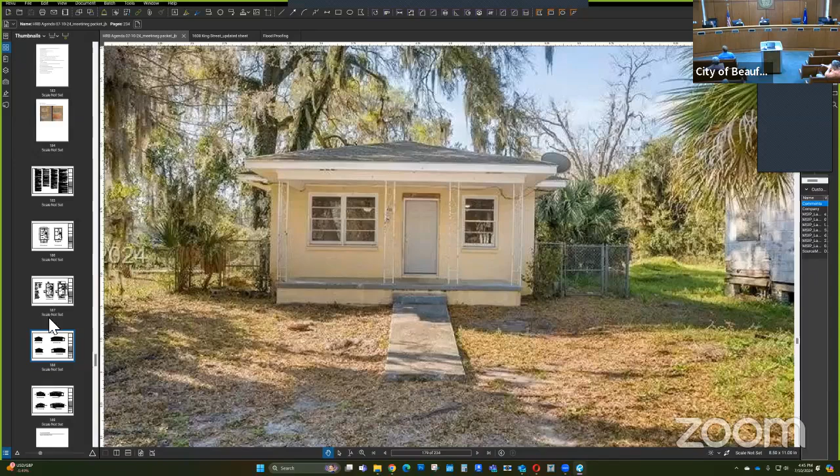It's a closed soffit building. So the reality is, we have to opine, it's non-contributing. You want to allow them to take the soffits loose and expose tails and make it look like a Beaufort cottage? We can do that. If you want to tell them you love the form and you're going to call it mid-century modern and you like the wrought iron stuff and you're not going to make them take it off, that's fine too. You want to allow them to do columns? Nothing in the code says they can't.

It's your decision. Well, the applicant is here, she can still respond again, but what I heard was she was open to ideas for alternates, and not just one. So would you mind coming up and telling us what you agree or disagree with on staff comments, or what you're really trying to get done here that you would like to see us approve?

For the rafters specifically or in general? General. Well, the columns, the rafters. I'm more interested in general. What are we trying to achieve in general? I'd like the exposed rafters. I think it's kind of cool that it's a Beaufort cottage, especially because the soffits are all rotted.

But I want to make a very clear distinction. Right now, this house is mid-century. We're bringing it to mid-century modern. And for that, some elements have to change, but there must be respect for what it was before. And in order for it to get to be a historical property, it must last that long. With climate change and everything, you gotta have a strong little house that's gonna last another 50 years.

It's a cinder block house, it's gonna have a metal roof, and it's gonna have windows that aren't made of rotted wood, wrought iron pillars that aren't made of rusty iron, in order to make it that far. And that's my hypothesis, but that's the general direction I'm going in. You like the way the house looks? I need it to be a strong little house. I think that's what I want it to look like.

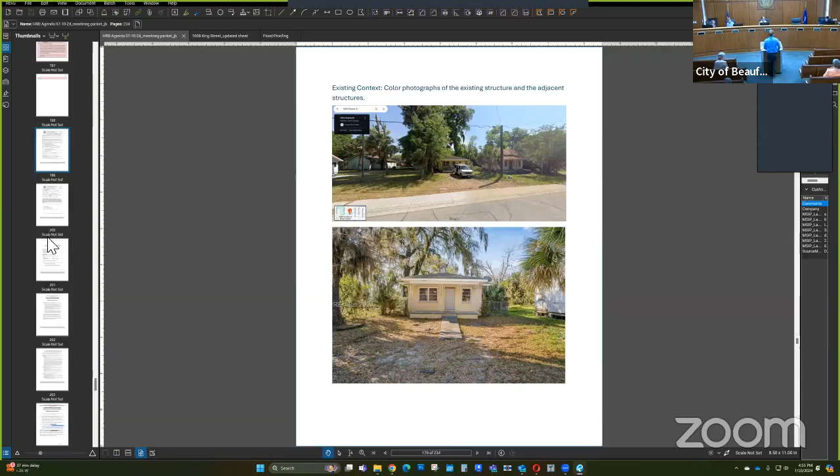All right, where do we end up? Lost my schedule here. Should we just table the last one? Was that a motion to table? No, it was a question. It was interrogative. All right. Goodness. All right, is this the final one? This is it. We're done, pretty good here.

So this is 101 Scott Street. This is actually final approval. Sorry for the slight mix up on that. You've done a lot of discussion on this in the last few meetings, so I don't know that we need to go over all of that. So let's just go over the changes from preliminary to final and the big issue that remains. The applicant has provided a few slides going over those three main changes: to provide color renderings, typical sections, and restudy the elevation and topography of the site and determine if the base flood elevation is correct.

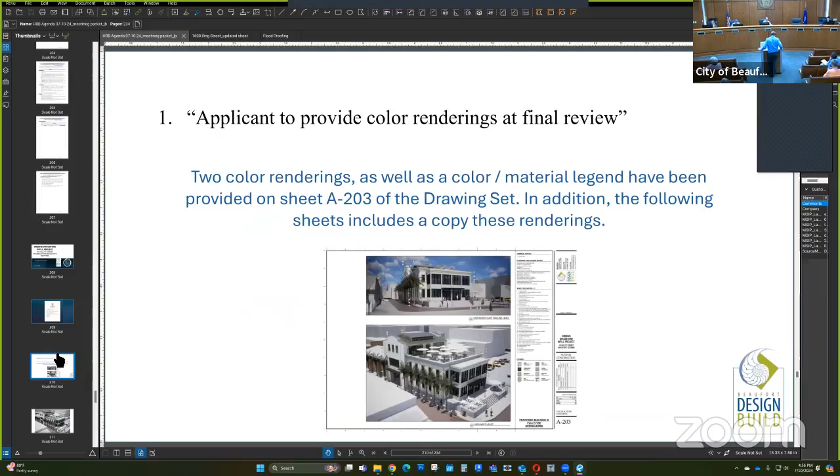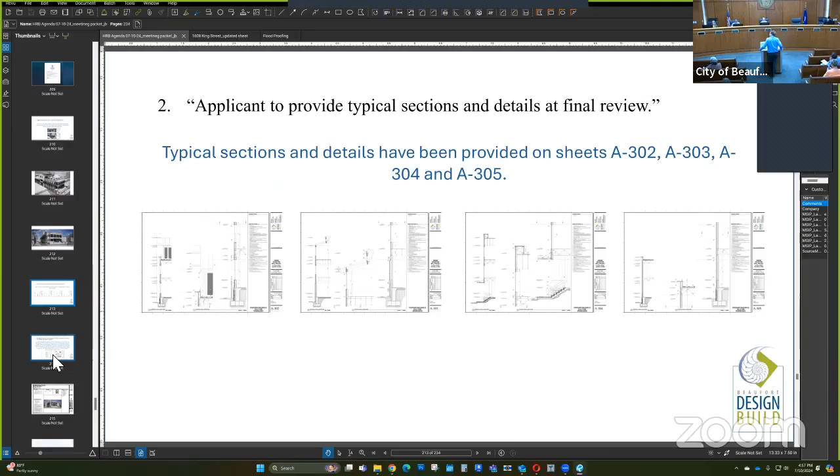And so they've provided the color renderings. Jeremy's going to that. They have provided the typical sections and details, and those were reviewed and found suitable. And then there was obviously a lot of discussion, as you can see in the report, about the floodplain and the base flood elevation. So I think that's the big thing here. As you can see on the application, this is below the 13 feet of the flood ordinance that we keep talking about today. They're bringing it up to 10 feet. Right now, this is about 6 to 7 feet high.

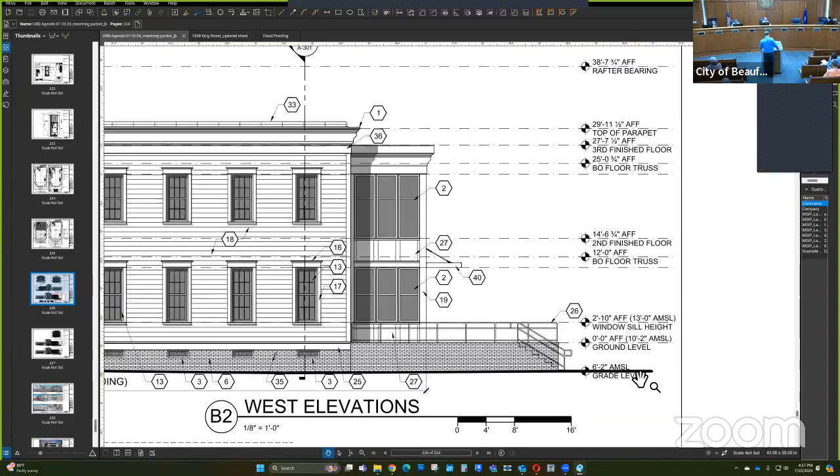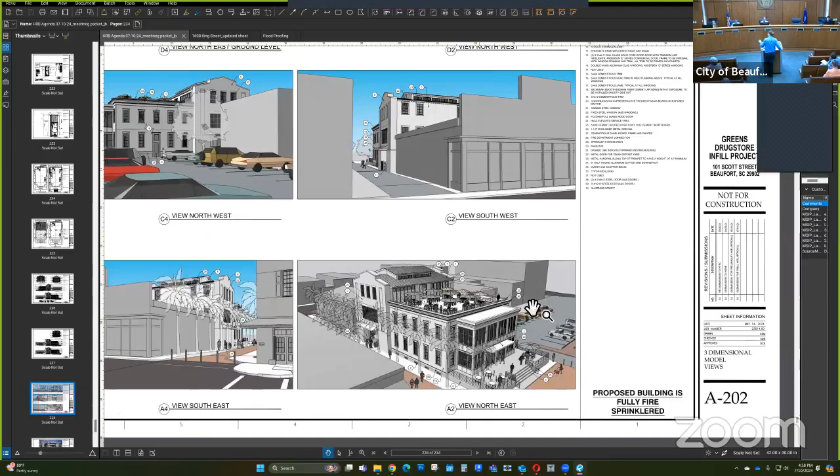If you look at the fill requirement of section 5-403(11), which is basically that you're not really supposed to go over 3 feet of fill, they're pretty much right at that. And again, the purpose of this, especially for Ms. Petrello, who wasn't here the last few meetings, was to figure out ways to really lower that middle building. I think they've lowered it about 3 feet from when this came to you conceptually, and we were trying to figure out, looking at that base flood elevation, is there any other way to lower it, and to make sure everything was done to look at that. So again, in the context of the fill, 3 feet, they're pretty much right at what they can do.

We also looked at the fact that they have to provide the handicap ramps. We felt like they could maybe gain a foot, but they'd have to flood proof that, and they'd probably have to put another switchback in the handicap ramps. So that doesn't really make a lot of sense just to provide that extra foot. We felt like the 10 foot they're proposing is probably the best case scenario, and that foot really doesn't provide any benefit to anyone. One thing: flood proofing more than 5 feet is never really recommended. It's not specific to the code, but that is just not recommended, from what I understand from our building official.

The only thing that we found that really needed to be done is there was no notation or detail on the flood proofing that needed to be done for that 3 feet plus the 1 foot over. So that would need to be provided on the final plans. And other than that, those are the two recommendations. Otherwise, we think that the applicants met all of the conditions that you put on them at preliminary and conceptual.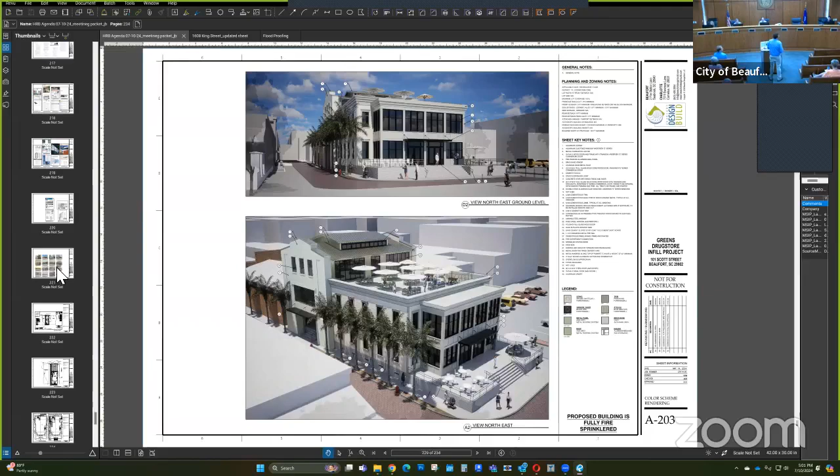We enlarged the trash enclosure area on the plan. Jeremy, if you get us there. It's not huge, but it was taking that comment into consideration and enlarged it, doubled it in size. So there's something there, but that was a change that was made. The renderings were provided, colors were provided.

We looked extensively at the finished floor elevation per your comments, Mr. Sutton. You're right, it was incorrect not only in the elevation drawings, but on the site plan. We've figured that the finished floor at 10'2", not 13 feet as previously indicated. That brings the overall building height down essentially 2'10".

That does kick in dry flood proofing. We were aware of that when we did it. It's an extra expense for the developer, but it does bring that building down. It brings that porch down to where you're not sitting above people and looking down at the park, you're sitting with people looking out at the park. So that came in as a comment most recently here, beginning of the week.

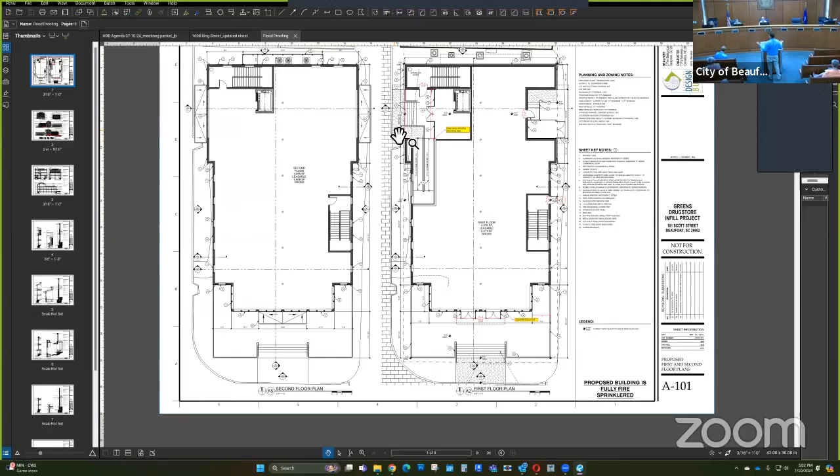Fortunately enough, our flood proofing consultant was able to get us their information back. I had sent that over to Jeremy just a little bit ago. So what we're looking at for flood proofing, the drawing on the screen now shows the doors that will require the flood proofing. So it's the 2 front doors, and the 4 side doors, 2 each side. And that would be to the 3 foot height.

Again, intentionally or unintentionally, the sill height of the window is set such that that's 13 feet. So we don't want to shrink that window any, and we can't, so that's where we're at. If that makes any sense. That's why the building's set. Other than that, I don't have much more to say.

Open the comments. Great, thank you very much. We'll let the public opine and we'll bring you back up, Mr. Berry, please. All right. Good afternoon, and a nice long day. Yeah.

As you know, we've been in communication with Adam throughout this project and the work that he's done, and we're appreciative of the modifications that have been made to be able to reduce the perception of height with this project. The one recommendation that I think staff had made about modifying the parapet on the front, we actually disagreed with, and the reason we did is that design that Adam has presented is actually the character defining feature

that connects it with the history of the waterfront, connects it with the other warehouse and cotton house structures that were along our waterfront. Specifically, he had used as inspiration the Waterhouse cotton gin along the waterfront. So I think by removing that, then you lose that really, I think, important connection to the history.

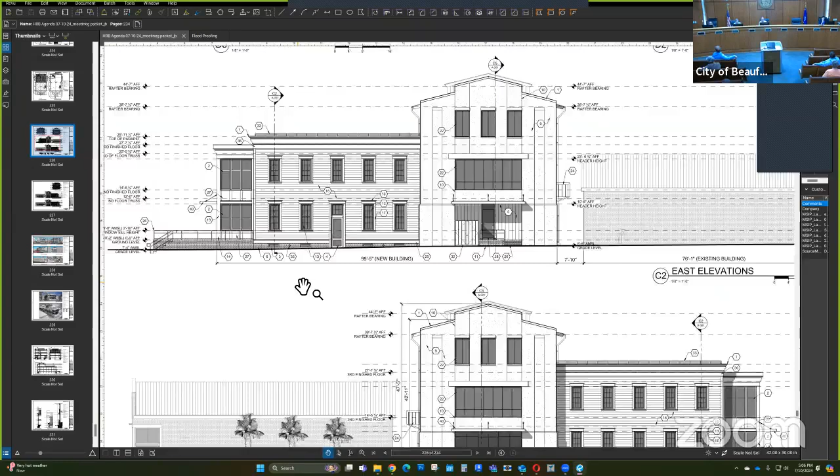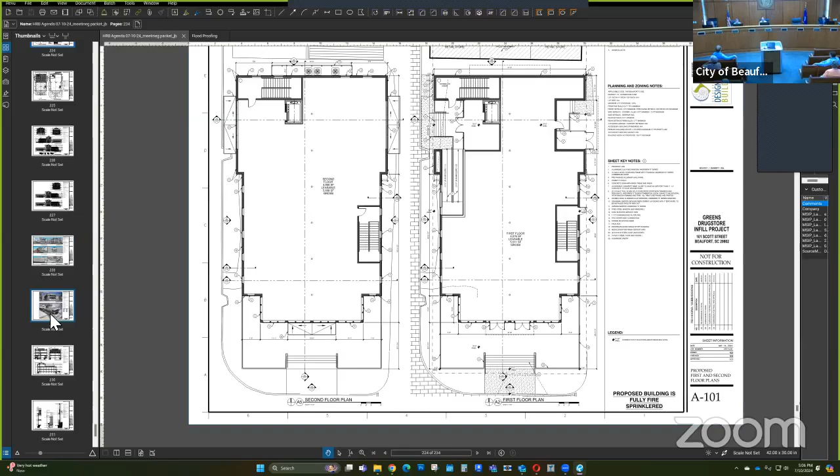I know that setback had some impact on your handicap ramp because you had to go up and you had to balance that against the grade. And then, of course, that triggered the flood proofing issues, which was not on the table at the last discussion, so we didn't bring it up. It was triggered by the code. It's required in the code. It's not something that we have a choice over as HRB. We're not gonna tell you you don't have to do it. So you seem to have found middle ground there. It seems to work. So I'm good with that.

I did have a question on, you know, the pictures are pretty when you do them like this and you see palm trees and things, that does soften that edge. But I'm not quite sure about the sidewalk and how that works with trees and the narrow lane you have there already and the setback. Is there enough room to actually do that landscaping?

We're on the lot line if you look there. So that's going to be a City issue? Okay. You put it on your picture, but that's gonna be up to the city to do. We'd like the city to consider. Okay. All right, so we can assume that the trees aren't gonna be there, so when you look at that picture, make sure there's no trees in your mind, okay? We have a representative from the city here? So, any other comment, please opine, guys, on anything you see here.

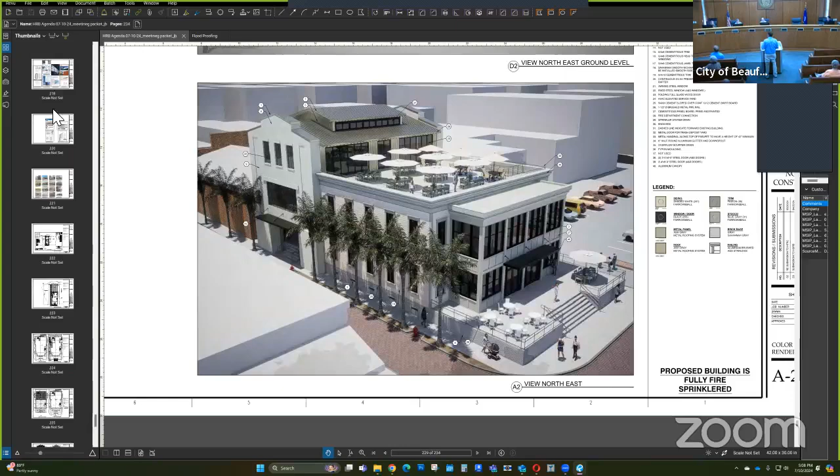I have a question about the windows. What is the color of the glass? That's a valid question. Currently, we have the black windows, but the glass has not been selected. That wasn't ever an issue or a thought, but that is a very valid point. Yeah, I love the windows that you selected, but the thing that always scares me about black framed windows is that, depending on the type of glass that goes into them, they look like big black holes on a building. No doubt. And I think downtown, in this environment, I don't know that that's very appropriate. So I was wondering if there was a way, whether they put a light colored shade on the inside so you can actually see the grill.

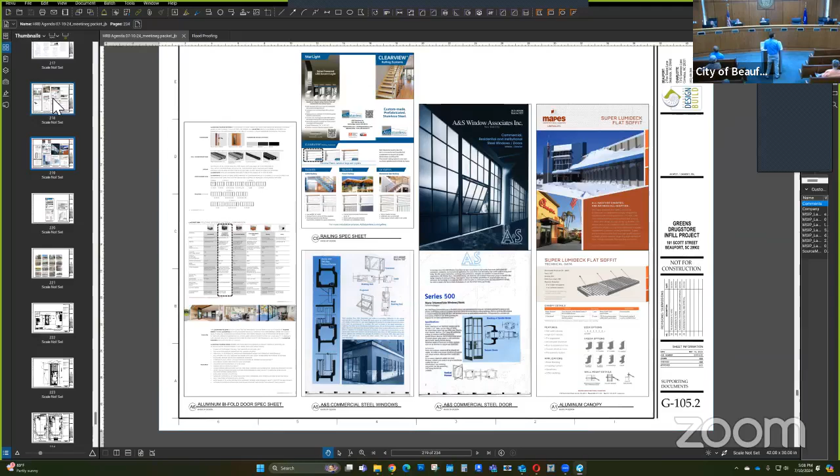So they will be, it's an Andersen E series, if I'm not mistaken. Where's that at, Jeremy? Isn't it the Andersen E series? So it would be selected from their standard glass selections. We're not going to ask them for special glass, but it would be selected from them. I don't know if that answers your question or not. I hope they're not going to be really dark. We'll do our best not to make them dark. We want it to be as light as I would assume you would. We don't want it to look dark.

This is your first meeting. If you feel strongly about that, when you're making a motion, since this is final approval, you can make a recommendation that the applicant make every effort to lighten the appearance of, however you wish to frame it, and see if you get a second. No, thank you. Yeah, it could be a condition. Do you agree or disagree?

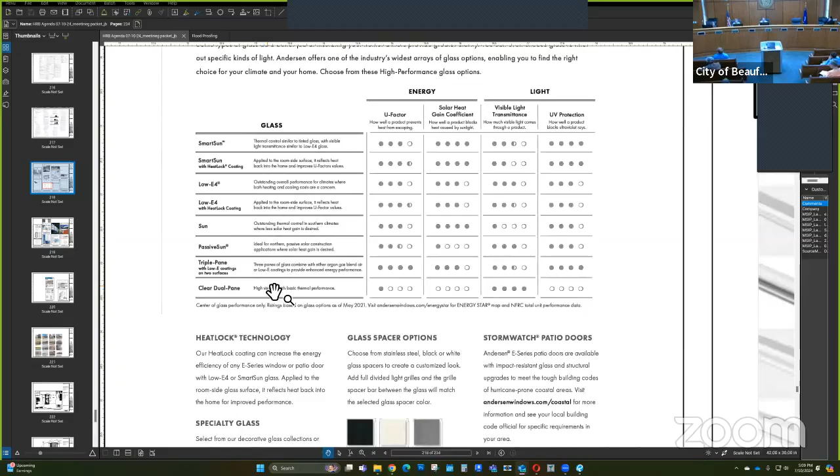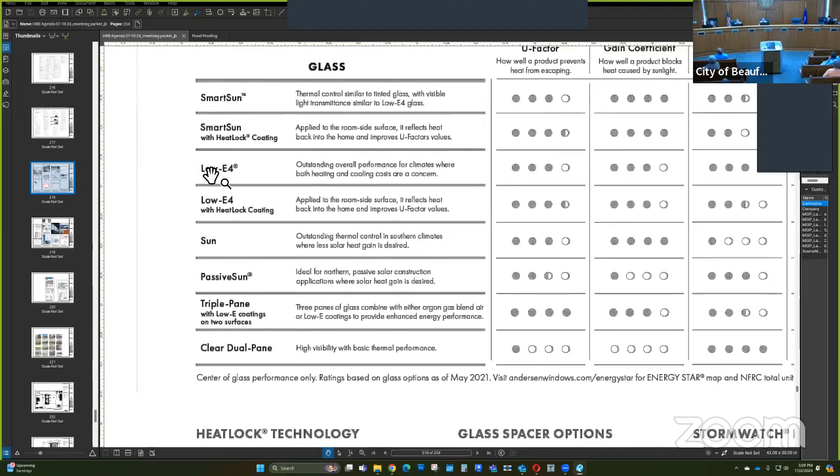I think it's a good point. I didn't think about that. I don't know what glass options there are for the Andersen E series, but I would... Is he pulling this up? What is this? Sorry, this is just what's on Adam's presentation. So these are the options. Of course, there's no visible imagery to go with it, but I just think it would be really nice to be able to see the window and not the big black hole. Yeah, they are so nice.

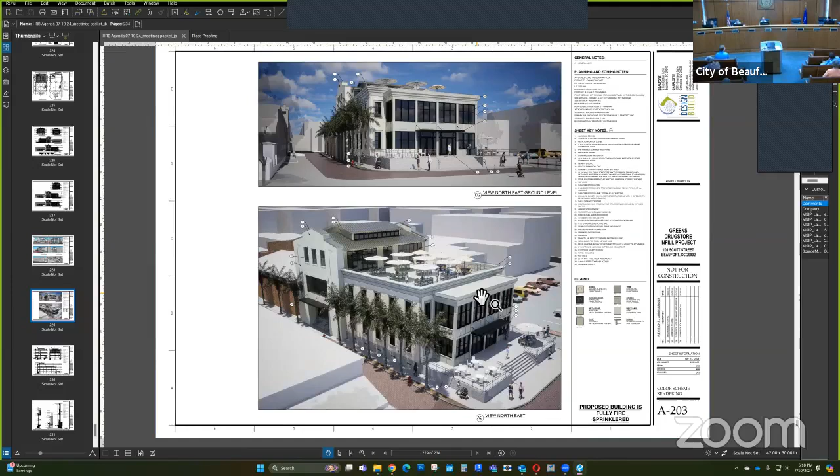My overall take on the project is they've done everything we asked. I think it looks great. I liked the project from the beginning conceptually. I think the elevation thing that was brought up in the last meeting, which has now been dealt with, basically brought the entire building down almost 3 feet. So I think a lot of the contention previously, I know Rita's not here, but one of her main contentions was the overall size, which they had reduced previously by almost a foot, and now an additional 3 feet just topographically. I mean, I'm in support of the project.

And one other thing: you show flood vents, but you show a monolithic slab on the design. What are the flood vents doing? It would be a faux flood vent. Okay. They're not real. You felt that was important to do? We did. Okay.

I'll make a few comments. I'm generally in favor. I think it would be unfortunate if the trees that are shown in this illustration couldn't be. I know there's limited area there, but it certainly helps to soften the building and create a nice streetscape or alleyscape. So maybe there's a way to work between the developer and the city to try to make that happen, if not to this degree, something similar or close. I would agree that the scale of the building continued to come down from day one, which I think we'd all agree was positive, and the almost 3 foot reduction from the last version was significant. So I'm glad they were able to make that happen. Really in favor of it.

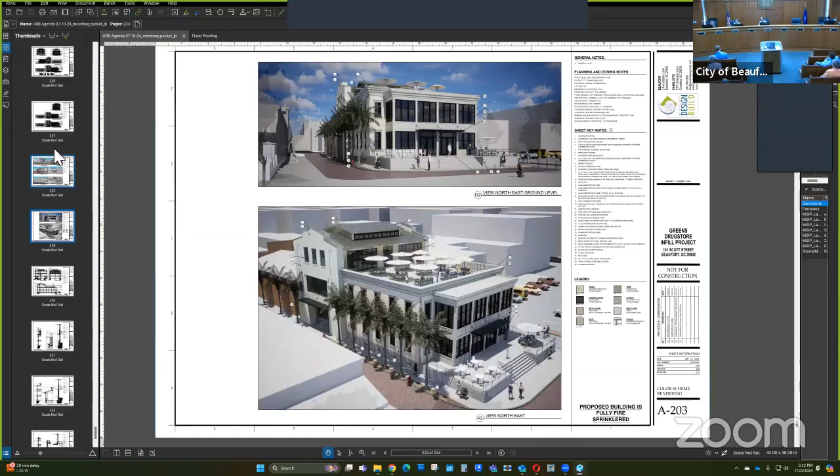I'll be honest with you, I'm not certain it's coming down at all. I think it's a topography issue and a flood zone. I don't think the building really got reduced that much because it's still showing almost 50 foot tall at the ridge line. It's 47 and some change at the parapet wall cap, and that's kind of where we were. Well, there's the nominal height and then there's the relative height. The nominal height hasn't changed, but the relative height to Bay Street has come down. Well, my problem with it is it exceeds almost every building on Bay Street. It actually becomes the tallest structure at the ridge line, even though that's semantics at this point.

I'm gonna support it, but I'm telling you there have been lots of battles in the past about height. The old code had a 50 foot maximum height. Now, the new code would have allowed this building, probably without the flood issues, to be up about 53 feet based on the height of the interior floor spaces. They've got it down the best they can, but you're not fooling the citizens of Beaufort that this is not gonna be a big building. I remember discussions about the buildings being designed behind the Verdier House, that you wouldn't be able to see the church steeples from the bridge. Well, same thing applies here. You won't see the Verdier House coming over the bridge when this is built.

So it's an odd situation where we have a developer that we're okay with. He meets the code, right? Isn't that what we always say? It meets the code, but we also have to have the review process, because that's part of the code as well. So I'm very supportive of the building, and I'd be happy to see it actually get built, because more often than not, the economy changes and things don't happen. We go through all these gyrations and the citizens get upset. Believe me, I've had a few phone calls, but our job is not to stop progress and development. It's to review the architecture and make sure that it fits.

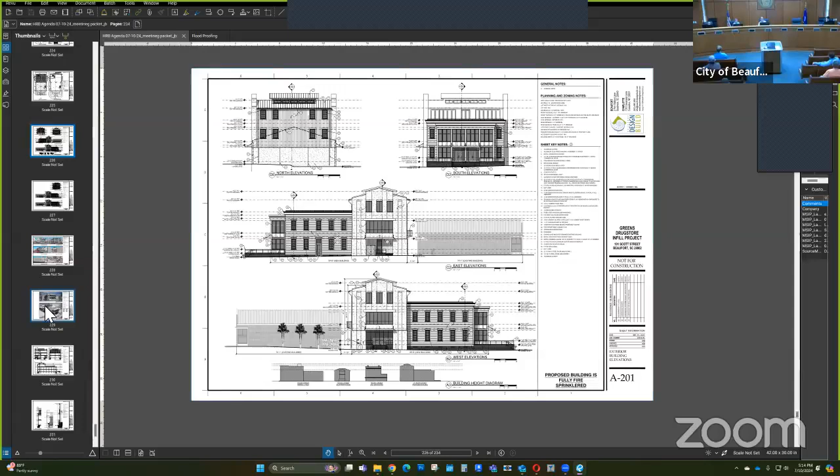This is a beautiful looking building. I don't particularly like the tall connector, but it is a good looking building. And I just hope, Mr. Trask, that you actually build this thing, okay? So, thank you.

I don't have any other comments on it. I think they've covered it. Well, I think you have to make your inaugural motion on this one. So, the biggest one here. At what point will we, I mean, I honestly would really love to see what the glass is gonna look like, but I agree. Sure. I want to be able to see the window. So do you want clear glass?

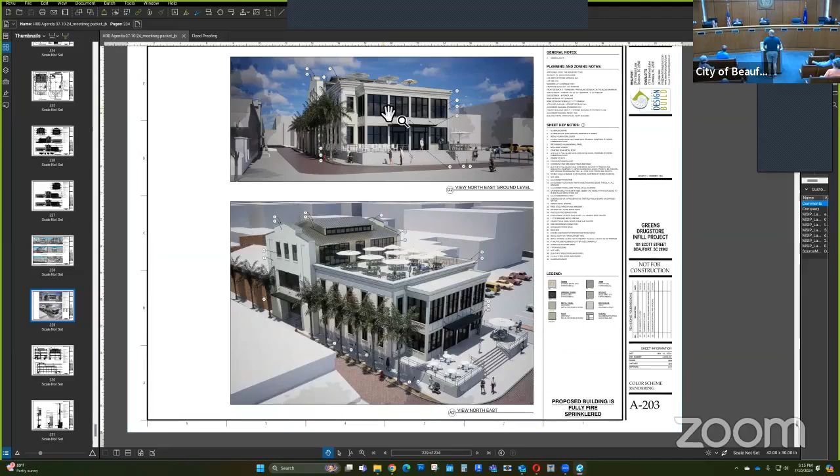Now, all I'm saying is that most of the time that I look at a black framed window, for whatever reason, you don't see the frame. It ends up being so dark that, especially during the day, if there's no light behind it, it just looks like a big dark. So what's the solution? I don't know, and that's what I'm trying to find out, because I would love to see.

We were expecting clear glass in the window. I just want to be able to see the window, because it's a nice window. Yeah, no, it's lovely. At least I didn't envision black or dark glass. It would not be tinted glass. It's clear glass. Is it the bronze frame with the clear glass, or actual black? Black frame, clear glass. Clear glass, argon filled. Okay, was that the question? Yeah, because it looks very dark in the pictures, so I wasn't sure. Okay, thank you.

Yeah, her point, which resonates with me more, is that the massing changes when you do black with the glass. You really don't see the division in the glass, so all you really see from a distance is a big square, like it's an open building. So I get that, and that's something we talk about in the massing of structures. I think interior lighting and shades will impact that as well. So mandate the tenants put lamps by the windows. I've seen it change black to white on the trim detail and it completely changed the look of the building. I don't know how it would look here, but I'm not gonna ask you to do that.

Okay. Well, I'll make a motion to approve. Do you want to do it? I'll do it. Motion for final approval with the staff comments and recommendations. I'll second that. Okay, motion on the table for final, and a second. Any other comment? Hearing none? Aye. Aye. Aye. Okay. Congratulations, Mr. Berry, Mr. Trask.

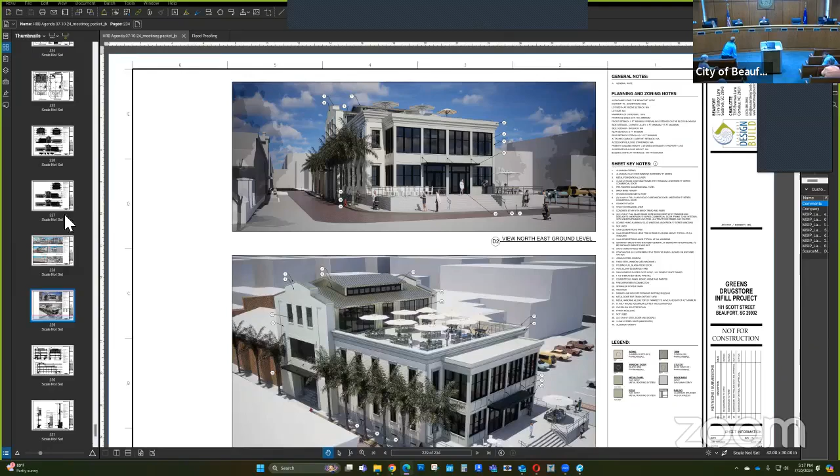Reminder, July 19th, 9 o'clock. July 19th, next Friday. And you guys are providing all food and beverage and transportation to and from the site? Not transportation, but if anybody needs a parking pass, you need to tell me. We're meeting down at the Digital Corridor. Well, we are gonna be at the landing pad, but if you'd like to do a little tour ahead of time, we need to coordinate that; otherwise, the lunch and the landing pad are coordinated. So the time again? 9 AM on the 19th at the landing pad. Landing pad.

Hey, Grady, before we adjourn, we have a new member. The question is officer selection. Do we need to opine on that? That came up this morning, and as we read the development code, the officers were selected in November. The reason being that Jeremiah was the chairman, and the new members, like Mr. Berman and Mr. Woods, were appointed in October, so their first meeting was November. Since Jeremiah was chairman, that election was done in November. So the way we interpret it, this November you will be electing a new chairman.